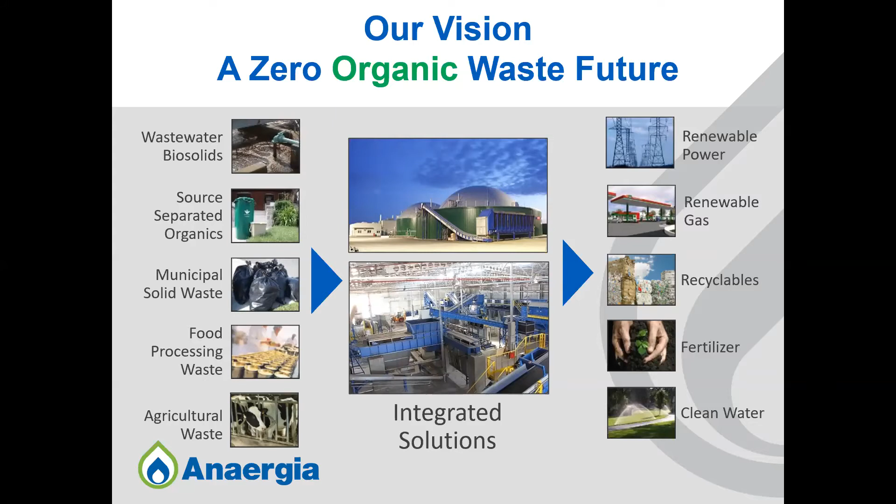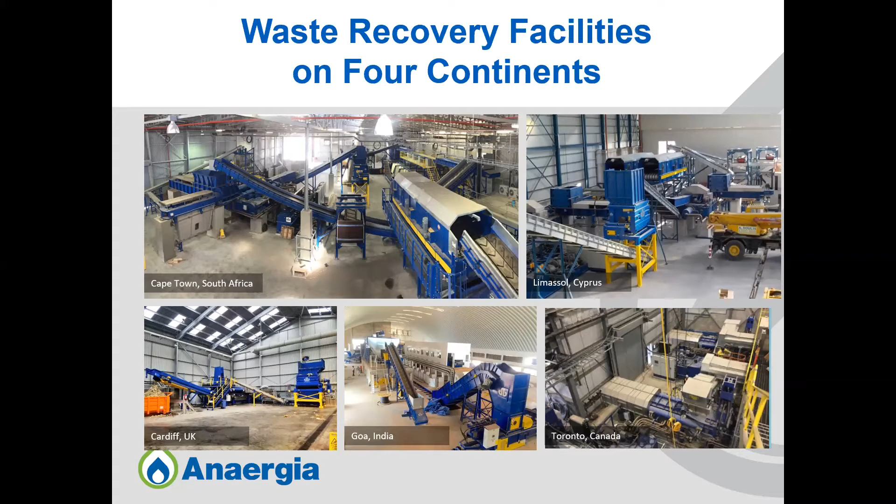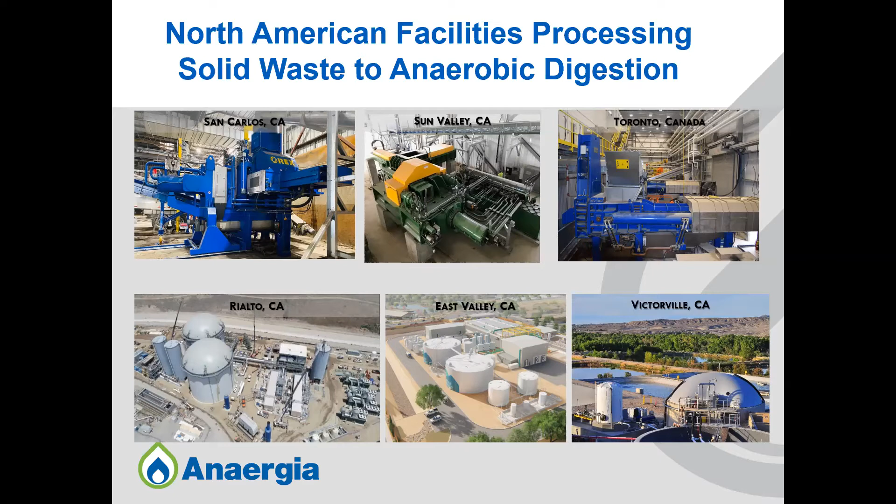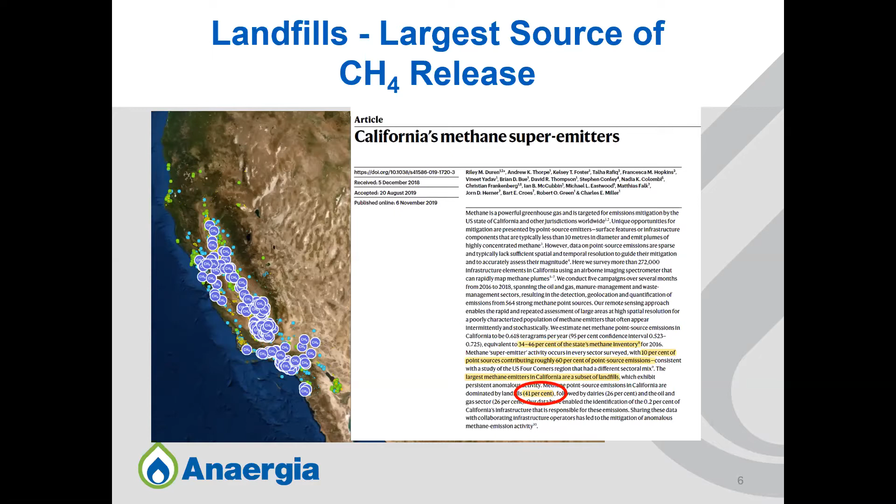Just want to zoom in now into California itself. The largest source of methane emission in California is landfill, which accounts for about 41% of methane from point source emission. You see all the purplish circles where landfills are emitting methane. This triggered the California regulation SB 1383 for the diversion of organics from landfill. This regulation stipulates a 75% organic diversion by 2025, based on a 2014 level. Looking at the projection, it will require something like 20 million tons of organics to be reduced. That's a phenomenal amount of organics that needs to be diverted.

The acceptable options for diversion of that organics are anaerobic digestion and composting. Those are the two acceptable methods. To achieve that, some have estimated it would require upwards of 200 organic processing facilities in the state of California alone. Yes, California is bigger than New York population-wise, but if something like this is mandated in New York, it will require a phenomenal amount of infrastructure.

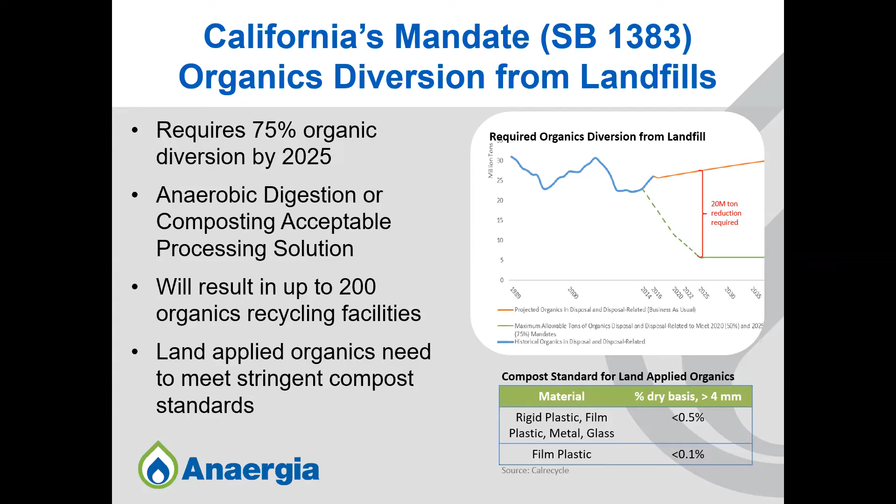Now, one of the fastest ways of achieving this is to extract organics using anaerobic digestion technology to produce methane gas, capturing that methane gas and producing power or renewable natural gas. If you look at the carbon intensity associated with landfill, it has a huge positive amount of CO2 per ton of waste. It's over 200 positive. Even composting has a small positive impact, though significantly less than a landfill.

However, when organics are separated and go to a wastewater treatment plant for co-digestion or dedicated digestion, you end up with a very negative impact. So it's a carbon negative fuel. You're generating a carbon negative fuel if you take organics to an anaerobic digestion facility, and specifically to an anaerobic digestion facility at a wastewater treatment plant.

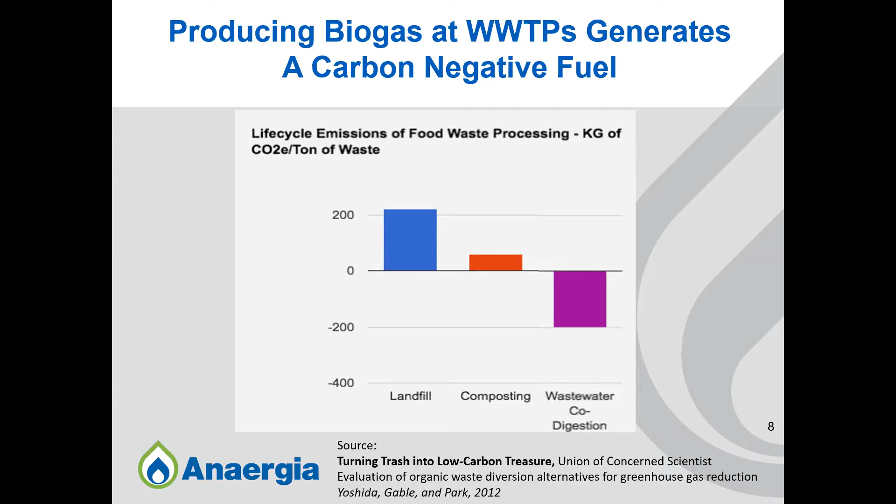This is sort of one of our approaches to organic diversion across the country, in fact. And this is not just Anaergia, but there are other entities that are doing this or looking at doing this as well, where we try to use existing infrastructure, especially associated with wastewater treatment plants, which have digesters, which may have extra capacity or the ability to increase the capacity of those digesters. And in addition to digesting wastewater biosolids, you're taking the solid waste, extracting the organics from it, and sending that to a wastewater treatment plant for co-digestion.

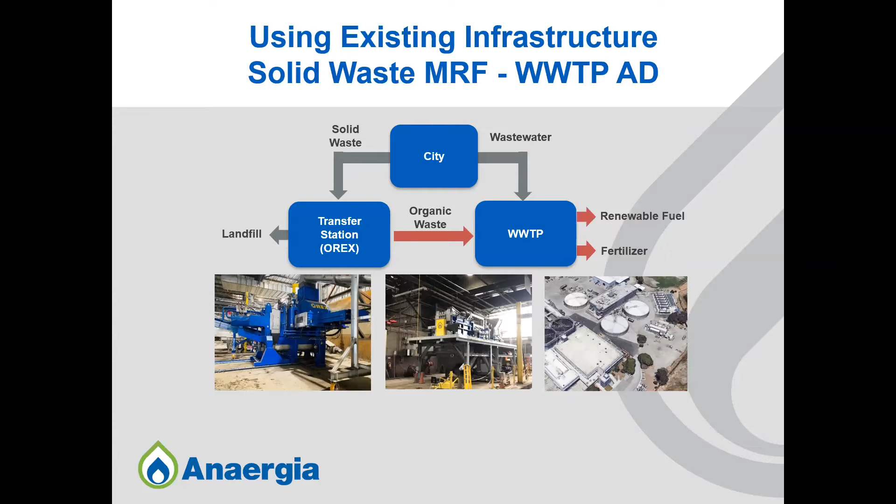And this will generate significant benefit for the wastewater treatment plant in terms of tip fees and more renewable energy generation, but also results in a significantly negative carbon intensity. Now, before you get there, the question is how to separate the organics. There are two philosophies around this, two approaches around organic separation. One is separating the organics at the source, which is separate collection where you have multiple bins, source separated organics, and then you're taking that to a compost or to a digestion facility.

I could tell you that source separated organics may sound great. And usually, for the first 5-10% of participation, it's relatively clean. But as you get up in participation to 50 or 60% of residents, you have an increasing level of contamination, and in Toronto, for instance, we're processing SSO with 25-30% contamination. So it still requires a significant amount of processing.

The other approach is to use a mixed waste collection instead of separate collection, and processing that using a mechanical biological treatment process to separate the organics from the waste, and sending that organics to a digestion facility. Either it could be a dedicated digestion facility, or it could be a digestion facility at a wastewater treatment plant. Some of the benefits for the mixed waste collection and sending it to a wastewater treatment plant is, with mixed waste collection, you're not trying to change behavior in terms of separation and having separate bins and things like that. And it also results in lower costs. You can also use existing infrastructure to process that organic.

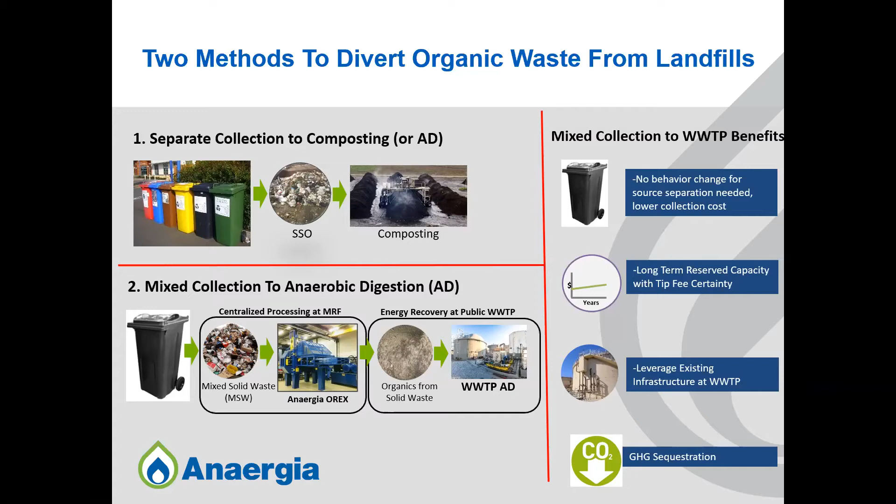In addition, with separate collection, you have to look at the carbon footprint associated with separate collection of that organics as well. And that becomes especially important if you start only collecting a very small fraction of the organics that's in the municipality or in the community. If you're only collecting a small amount and expending a lot of energy in terms of both costs and energy in terms of collection, then you're defeating the purpose.

And this sort of triggers why our preference is the mixed waste process at a high diversion organic processing facility, where virtually everything goes into the same bin or bag, and then it gets processed at a high diversion processing facility, where you remove the recyclables, and you may be able to even generate some RDF if you can get an offtake agreement. But definitely you can remove recyclables, remove the organics, that then goes to a digester, and then the non-combustible, non-digestible, non-recyclable material will then go to landfill. So there's still a place for landfill, but you preferentially would take recyclables out, organics out, combustibles out, and then you send the rest to landfill.

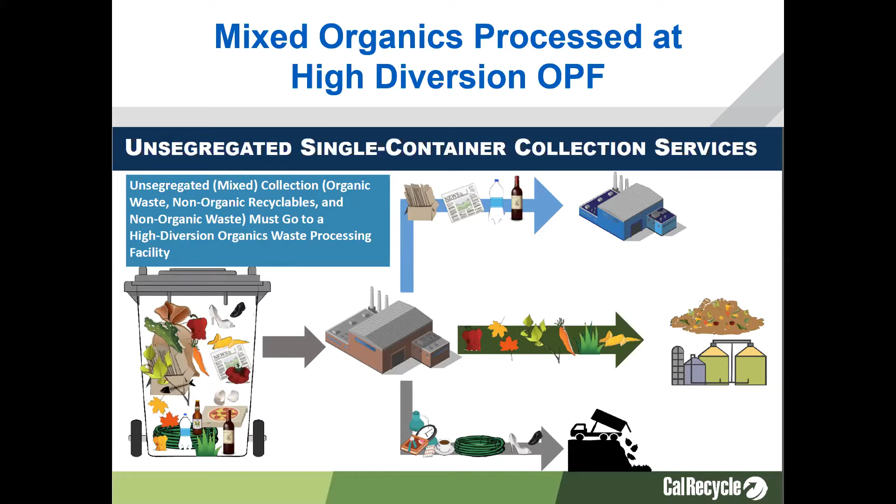We've done some analysis on this and looked at both the collection of the organics as well as the processing and then transportation and disposal. And even if the numbers are not exactly the same, what it tells you is that source separated organic collection results overall in a significantly higher cost when you get up into scale, if you're trying to achieve a high level of diversion, compared to a mixed waste collection and processing.

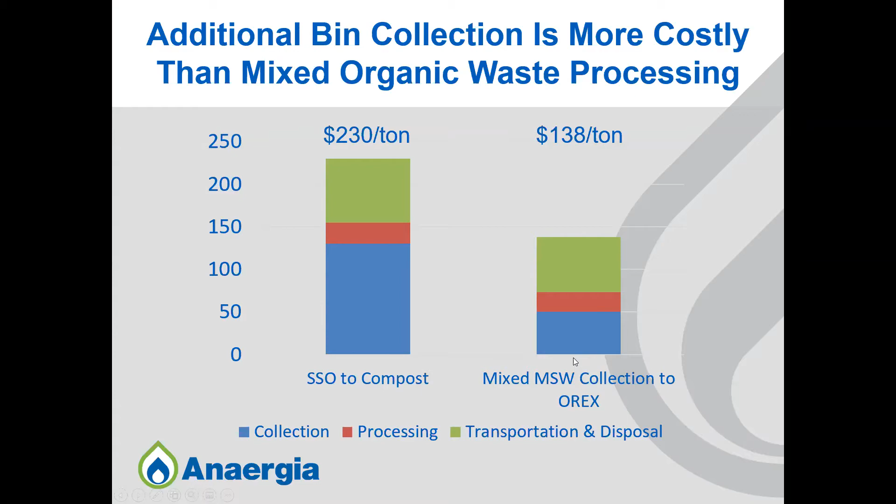With that said, I will go through a case study based on a facility that Anaergia has designed and built in California over the last several years, and that's just coming online now. And this is the facility in Rialto, California. It's referred to as the Rialto Bioenergy Facility for recycling of organics. It has a processing capacity of 700 tons per day of food waste. And this is food waste already extracted from commercial solid waste and mixed solid waste, as well as the ability to process up to 300 tons a day of sewage sludge cake, dewatered sewage sludge from wastewater treatment plants. So this is a project that Anaergia developed, designed, financed, and will operate as well.

For ease here, this project is really taking material from area solid waste, where organics will be separated at the transfer station. One of the main facilities associated with this is a Waste Management transfer station in Sun Valley, California, which installed an OREX press to separate the organics from solid waste and send that organic fraction to Rialto, which is near San Bernardino. As well, the facility will take wastewater sludge from the surrounding area, including around the Rialto area, and process that biosolids as well. And I'll show you how.

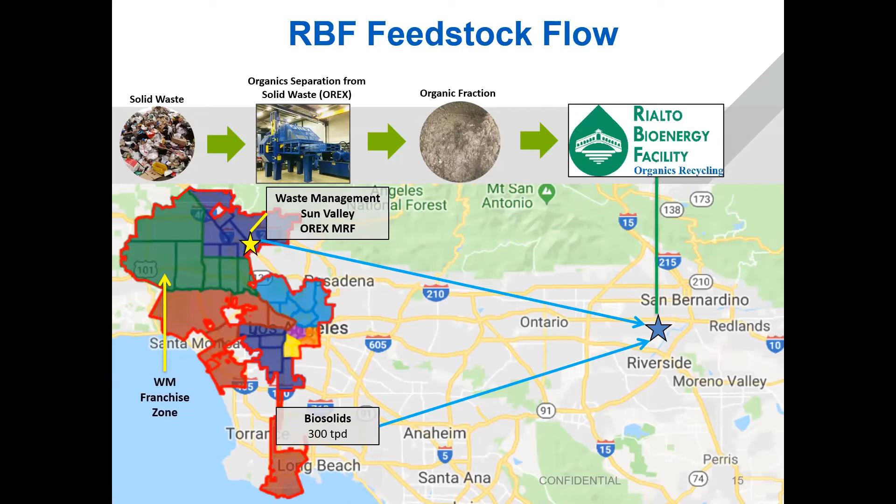So, one may look and say that you need to process everything at the same location. And that's not necessarily the case. You could process your solid waste in one location and process the organics in a different location. Similarly, you could process the mixed waste in one location and separate it into a combustible residue that can go to an energy from waste facility, the organics can go to an anaerobic digestion facility, the recyclables can go to a MRF, and then your non-combustible, non-recyclable, non-organic digestible material will then go to a landfill.

And that significantly reduces the amount of material going to landfill and extends their life. It will also improve the combustion in the energy from waste facility, because you don't have all these metals and maybe plastics and chlorinated plastics and things like that. So you're sort of getting the best of all the different fractions of the waste stream. And then in the case of organics, the digestion will produce biogas that has multiple uses. And the digestate that comes out of that organic fraction, you can convert into a fertilizer product and have nutrient recovery for that fraction.

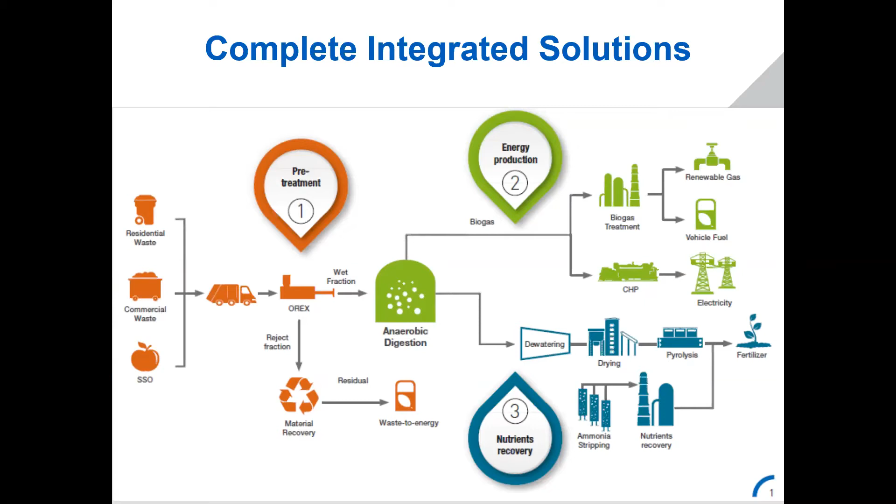In here, I'm just showing a quick example of different fractions: source separated organics that's fairly contaminated, commercial waste and mixed waste. This is just a schematic showing it will be processed, maybe at a transfer station using screens and the OREX press, etc., to separate the organics, and an unpolished organic fraction will then come out. It will still have 2 to 3% contamination in it with small pieces of thin plastic, hard plastics, glass, grit, etc. And then this goes through a polishing step to create a very, very clean organic fraction that then goes to a digester facility.

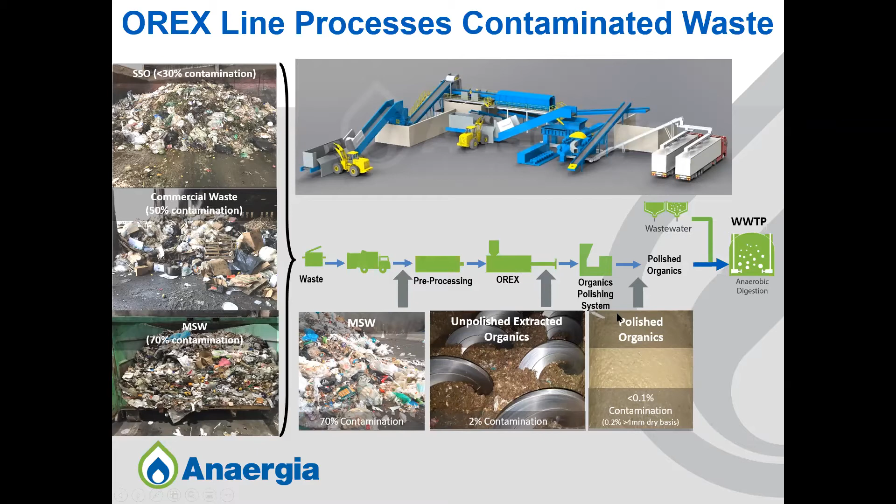So specifically on the Rialto facility here, we have a transfer station where the OREX press is installed, operated in this case by Waste Management, that separates the organics from mixed waste, MSW, or commercial solid waste, and then sends that separated organics as a cake to the Rialto facility, which goes to organic polishing, followed by anaerobic digestion, and then the processing of the gas and the digestate.

Similarly, the dewatered biosolids from the wastewater treatment plant will be brought into this facility. But because these are already digested biosolids, we're putting in here a drying facility followed by pyrolysis to produce a biochar, which is a higher value fertilizer. So there's a two-step process, and there's a significant amount of energy recovery from the pyrolysis process: the pyro oil goes back into the digester, and the pyro gas is used, recovering the thermal energy in the drying process. Basically the pyrolysis is an energy positive process where you generate more energy than it consumes.

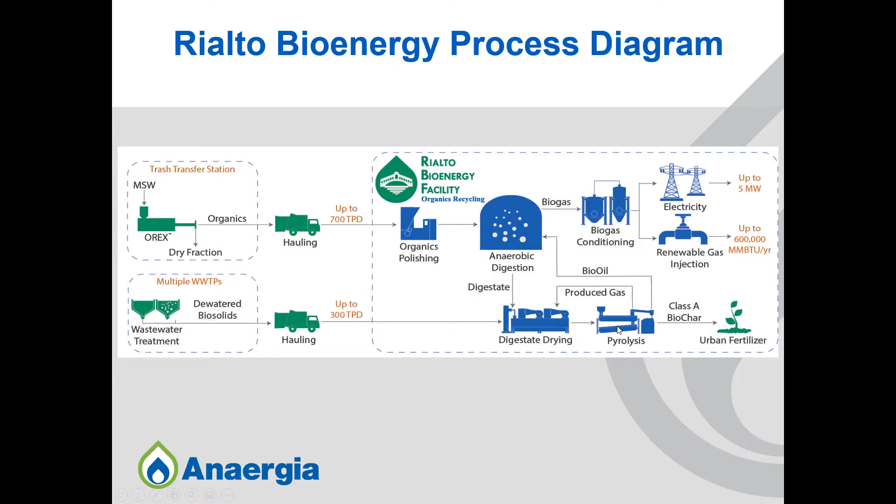So on the organic side, we separate the organics from the solid waste, sending that organic fraction for polishing, as I mentioned, 2-stage polishing: a dynamic cyclone to remove small pieces of plastics and floatables, etc., and then a hydrocyclone to remove grit, glass, stones, to produce a clean organic slurry that then goes to the digester.

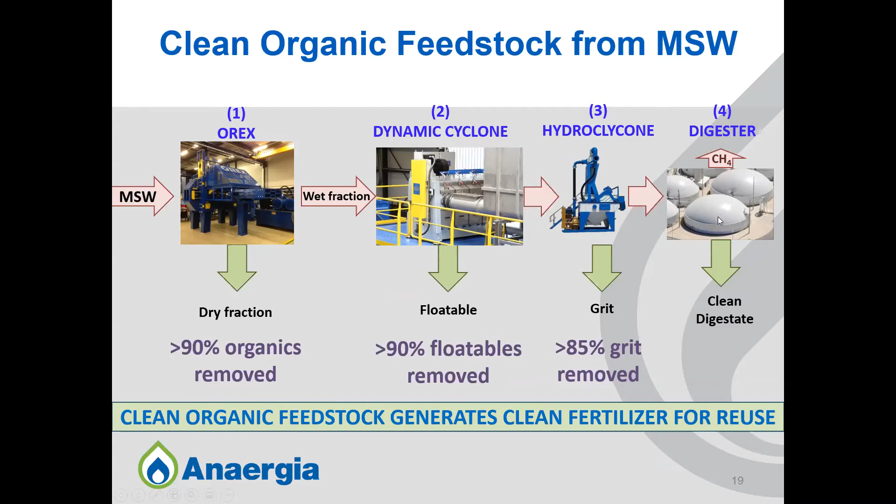This is what the OREX press looks like in Sun Valley, and this is another one in Europe that shows a better view, where the solids are entered into this hopper and then fed into these revolver type perforated chambers, and subjected to very high pressure to generate an organic fraction and a dry residue fraction.

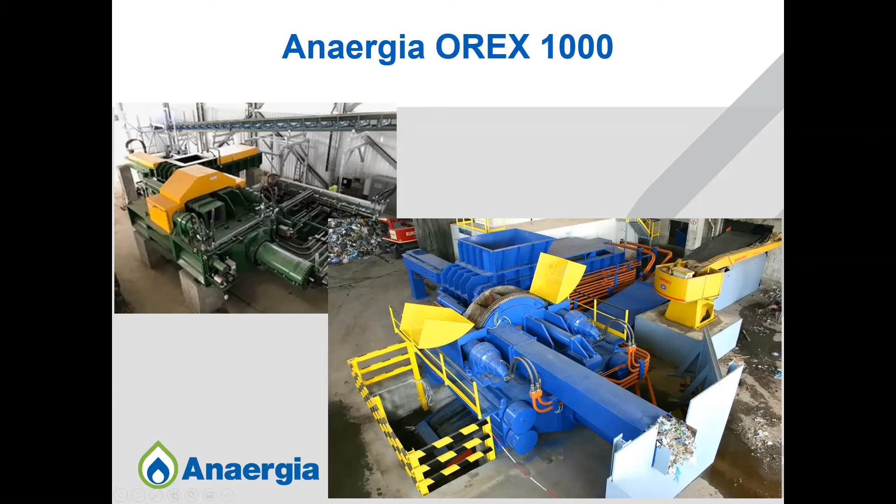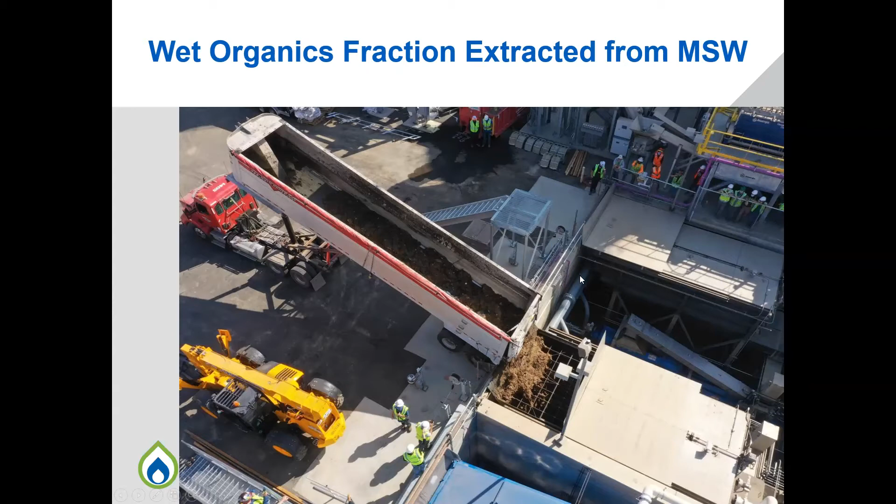This is what the organic fraction looks like. This is basically the first load of organic fraction that was delivered to the Rialto facility just a few weeks ago. As you can see, it's a cake, and there's still contamination in there. It gets into a live bin hopper that then feeds a polishing system. So this unpolished organics fraction gets fed to a polishing system to produce this clean organic slurry that gets fed into the digester.

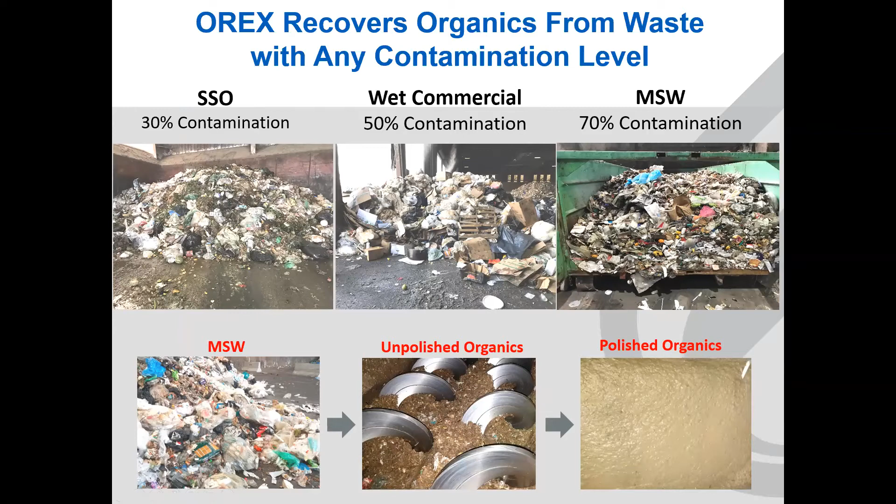This is what the polishing system looks like. It has a dynamic cyclone for removing the small pieces of plastics and floatables that would end up in the digester if you put the unpolished organics into it. And then from this dynamic cyclone, it goes into a double pass hydrocyclone to remove the glass, grit, sand, etc. The clean organic fraction is then sent to the digester, and the grit is washed, classified and sent off-site.

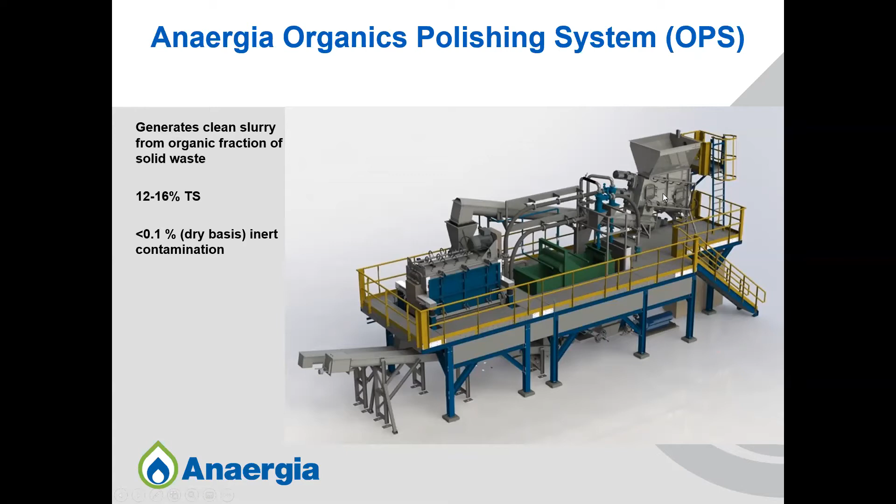This is what the facility looks like. These are the digesters where the organics will go. This is the reception area here. From the reception area, it gets fed into the polishing system, then from the polishing system to a buffer tank, and then to the digester. And then these are the dryers, centrifuges, CHP, etc.

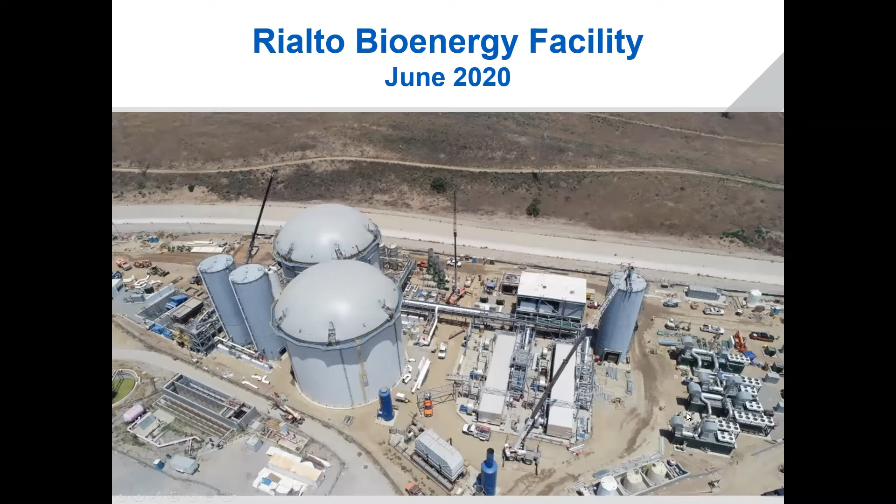So this is what the facility looked like from a rendering back in 2018, what we anticipated the facility would look like at the start of design.

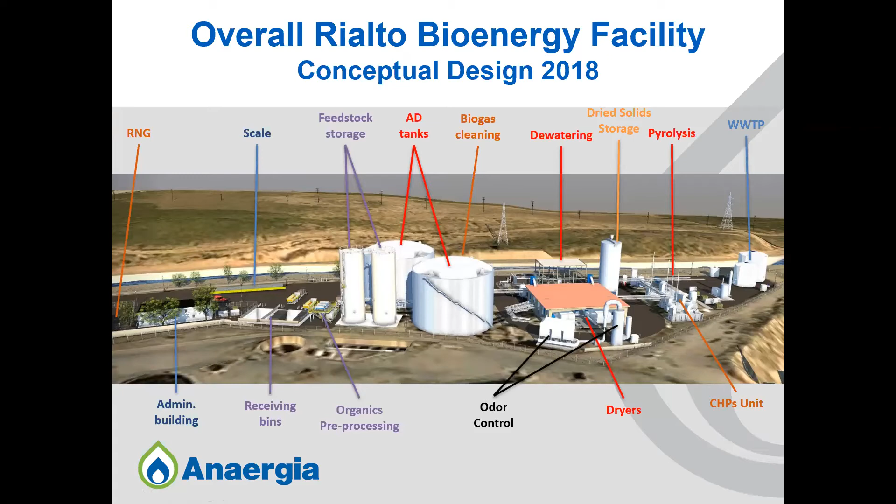This is what the facility looks like today, as of this week. You see there's a receiving bin for the organics, the polishing system, storage tank, digesters, and the biogas cleaning and upgrading systems are here. There's a waste scale, then dewatering, drying. The pyrolysis system is not in place yet, but this is where it will go. CHP and wastewater treatment for recycling of the water back to the front end for dilution.

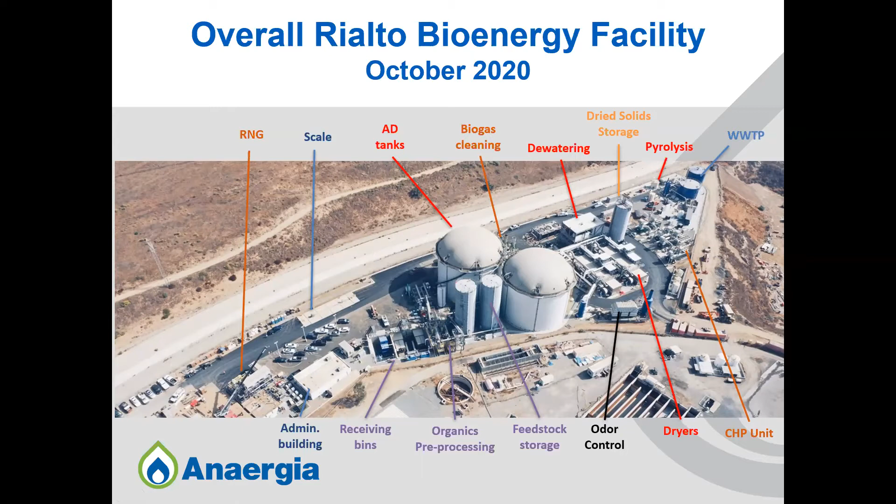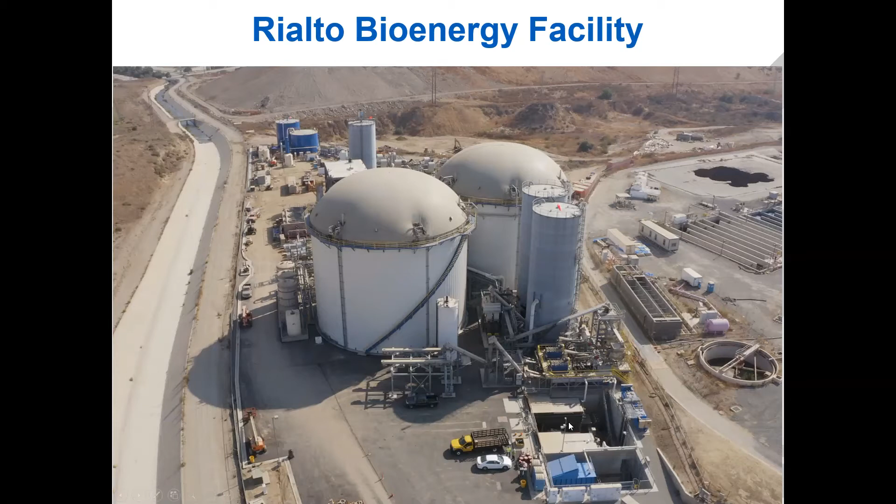And so this is a 5.7 acre site that will be processing 1,000 tons a day of organics from food waste and biosolids. So it's an extremely tight site. This is another view of the facility. Again, this is the reception for the food waste. The polishing system is here, followed by the buffer tank, and then the digester. The gas cleaning is here, wastewater treatment behind here.

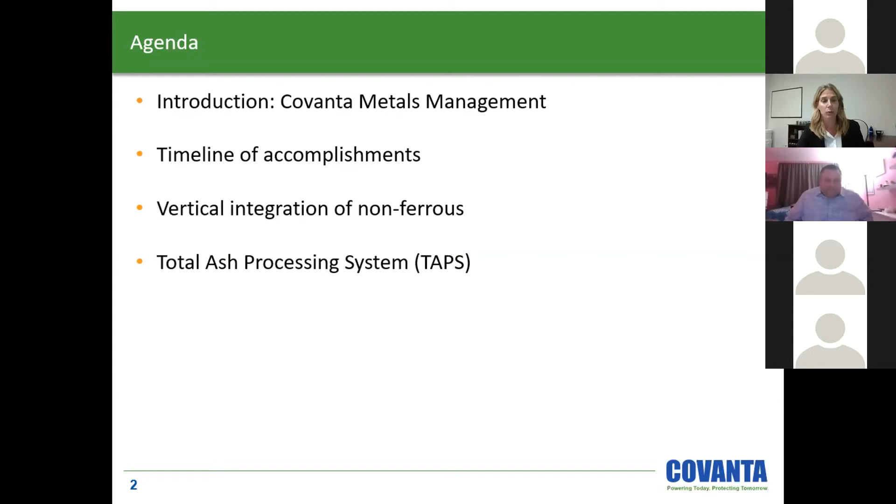But today I'm going to give you a brief introduction on the Covanta Metals Management Group, review our areas of focus and the timeline of our accomplishments, talk a little bit about the vertical integration of our non-ferrous metal recovery, but really want to focus on our total ash processing system, or TAPS as we refer to it internally. We've made significant progress on a really exciting project, so I'm happy to be able to report on that with you today.

CMM Group has several major areas of responsibility. We've got business management and development, so we've got projects at our energy from waste facilities to either install or optimize our metal recovery systems at the plants themselves. But we also have mobile assets, and we'll discuss that a little bit this afternoon. The total ash processing system, or TAPS, development and deployment has really been a huge undertaking over the last probably 3 years, and we've reached that point where we're making product, we're processing ash, and getting really positive results.

Out of this whole total ash processing system, not only are we getting metal out of the ash, but we're also generating a usable aggregate product that can go into the construction market. So I'll give you an update on that today and let you know where we're at. But then we still have a little bit of waste from the system. So how do we realize the value from that and determine reuse opportunities?

As I mentioned earlier, we are generating upwards of 600,000 tons of metal per year across the fleet. We do have folks whose entire focus is really getting those commodities to market so that we can recycle those metals. We have a new group formed whose sole focus is offtake agreements for these aggregate products. And we are embarking on a strategic plan for how to tackle this same issue in Europe for IBA processing and/or fly ash disposal options.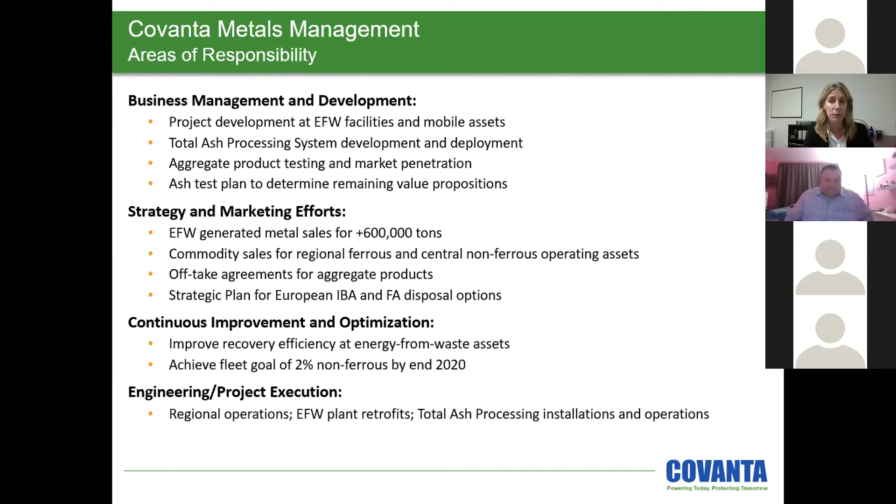Continuous improvement and optimization is always a focus for us. So we're always looking at systems that we have in place. How do we optimize them? How do we make them better? Our fleet-wide goal for 2020 is to reach a 2% non-ferrous metal recovery. As I show you the different parts of our fleet, you'll see how we're able to achieve that. And on project execution and engineering, we have regional operations, retrofits going on at our energy from waste plants, and the total ash processing facility is playing a big role. Since 2012, Covanta has invested in over 70 individual metal enhancement projects across the fleet in different areas of focus.

One would be on the ferrous metal side. We've been doing ferrous drum installations and upgrades at our energy from waste facilities. We've installed shredder and air classification systems, and we constructed and operate a regional ferrous processing facility, a non-shred facility, and we'll talk a little bit more in detail about that today.

On the non-ferrous side, this has been a huge success for us. It's installing and optimizing non-ferrous separation systems, eddy current separators, where we focus on both the plus 10 millimeter fraction and the minus 10 millimeter fraction sizes. What we're finding is the more valuable metal is in the smaller ash fractions. So how do we recover that metal so we can recycle it back to market? We've done a lot of tests on separating bottom ash from fly ash so we can get better metal recovery. And we also installed and now operate a central non-ferrous processing facility, and we'll talk about that and the success story there.

On the mobile side, we realize it's not necessarily feasible to send everything to one centralized facility. And at some energy from waste plants, it might not be feasible to do the level of metal recovery and processing that we'd like to do.

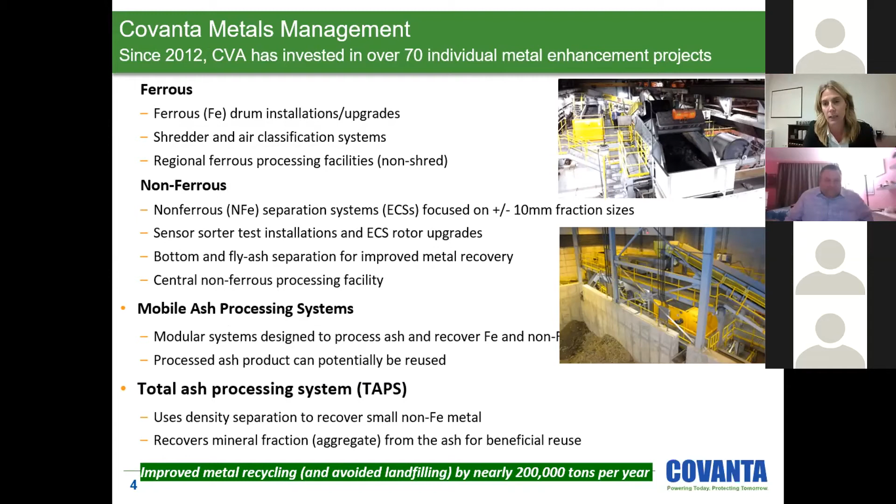The real success story, and we'll talk about TAPS today, is that we're now getting to the micron size. So in the past, about 4 millimeter was the smallest we could recover. Now we're getting down to the micron size metal with our TAPS technology. So huge success for us, and we're really excited.

So the Covanta Metals Management Group really formed in 2012. It started with 3 people, and now we're at, I believe, over 30. And the areas of focus for our group have evolved as we've learned more about our product. So 2012 and 2013, we were really focused on how do we get the metal out at the energy from waste plants? How do we effectively recover that ferrous and non-ferrous metal?

But as we were becoming more and more successful at metal recovery, we started to take a look at the ash itself. So 2014 was a huge research initiative to look at ash. What's in our ash? What value is still left in there? And how can we reuse these materials?

So in 2015, we built a pilot plant processing facility at a third-party research lab, and we processed ash from various energy from waste facilities across our fleet through a wet processing technology, through a density separation technology.

We're able to validate that we can recover these small, micron level size particles of metal, but that the inert material that's left is actually a really good construction material. It looks like aggregate, like a sand or a stone that you would be finding in a construction market today in applications like hot mix asphalt and ready mix concrete.

So while we started learning all of this about the pilot plant, at the same time we started looking at our central processing facilities, understanding that at the energy from waste plants, we were very successful at recovering both ferrous and non-ferrous metal, but that these metals still had some ash on them. It was a varying size, and we really weren't able to see the real value from them.

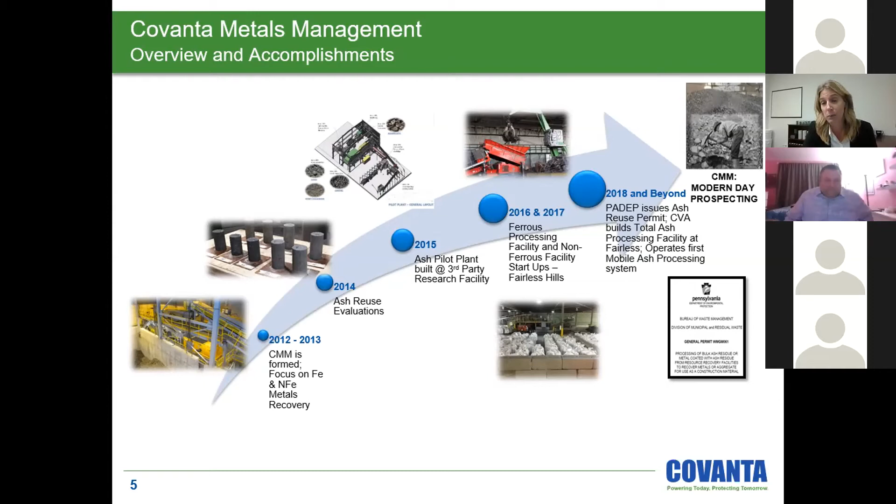2018 was really the kickoff to our TAPS, our total ash processing system, by us picking our site and applying for a permit from the Pennsylvania DEP to allow us to process energy from waste ash to generate a construction material. We kind of giggle amongst ourselves internally. We're kind of modern day prospectors in what we're doing.

So we've talked about the evolution of the different stages and the different roles of CMM over the years, but since we really started looking at metal and ash in 2012 to where we're at in 2019, it's been a significant increase in both the ferrous and the non-ferrous recovery that we're able to do annually. 2019, we ended the year with over 570,000 tons of ferrous metal recovered and over 56,000 tons of non-ferrous metal recovered, far exceeding our initial expectations, and we're seeing that these numbers are just continuing to climb.

So as far as metal recovery, we're actually over 600,000 tons now of metal each year, and that's really enough steel to build over 400,000 automobiles and enough aluminum to manufacture more than 3 billion beverage cans. So we're talking about a tremendous amount of metal that we're able to return to the market that otherwise would be going to landfill.

When you look at our environmental impact, let's say we were not recovering all of this metal; to produce and mine this new steel, aluminum, and copper is a really carbon-intensive process. So if this metal was going to landfill, it would be lost forever. But we're able to save more than 1.2 million tons of greenhouse gases every year. And that's the equivalent of taking 113,000 cars off the road every year.

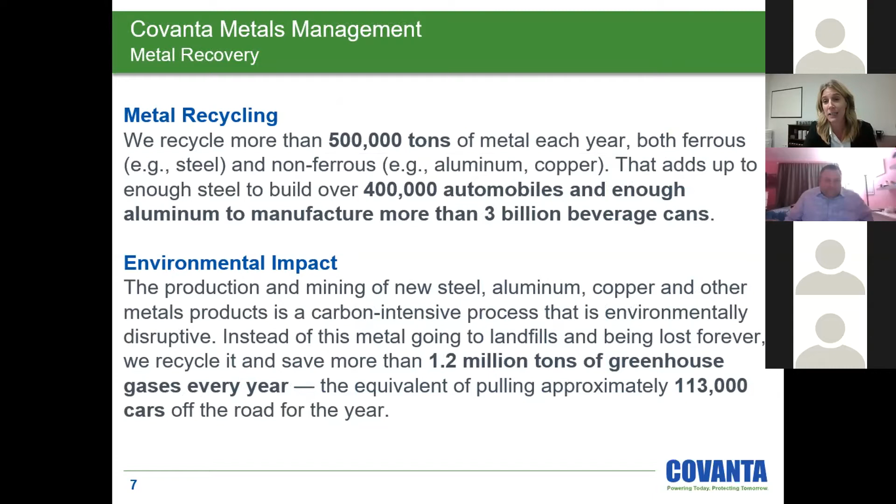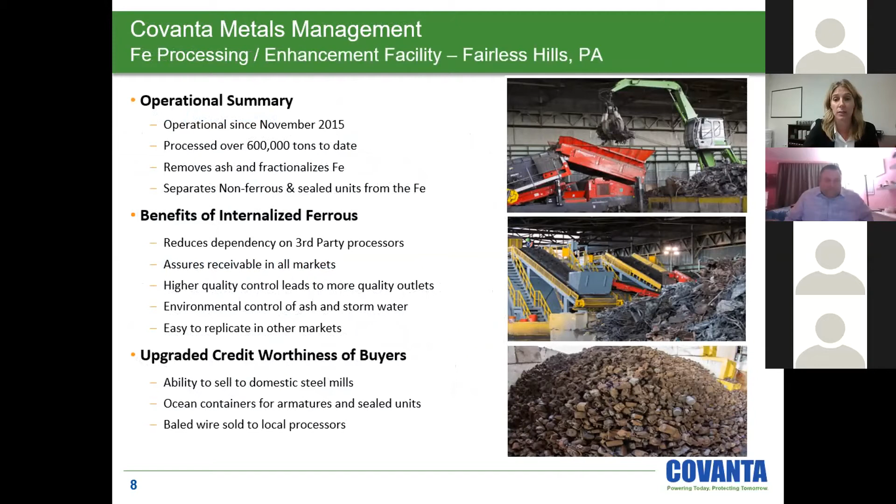So it's truly significant the impact our metal recovery has been. So we briefly mentioned our ferrous processing facility. We kicked that off in 2015. We're able to get the remaining ash off that metal, separate it into different sizes, and sell it to third parties. It's a higher quality because we've done this additional processing, and we've been able to realize more value there. We can now sell both domestically and overseas, and we can even bale material for local processors. It's a nice facility. We're able to do a lot of processing there.

The non-ferrous is really where we've seen our significant advancements. So instead of having a mixed non-ferrous metal, which would be lights and heavies combined, really with still some ash on that, our centralized non-ferrous facility separates this material by size, it separates this material by density, it cleans it, we're polishing it, and we're able to really realize the value of the different metal commodities that are in here. So instead of selling a mixed non-ferrous metal out to the market, we can give them a clean copper product or clean brass, clean zinc, a clean aluminum.

And shockingly, what people love when they come to a tour of the facility, the highlight is always the coins. Think about how many times you vacuum out your couch cushions or your car, and you're sucking up all of these coins. Our non-ferrous processing facility is actually able to recover these coins, and just the volume of coins that are in the trash is just tremendous. So the non-ferrous processing facility, operating since 2017, has been a huge win for the Covanta Metals Management Group and for Covanta overall. But total ash processing, kind of why we're really here today to talk about it.

Again, I had mentioned in 2014, we started looking at the ash to say, what's in this stuff? Is this usable? They started to evaluate the ash, both from a chemical and a geotechnical perspective, and realized this stuff could be used in construction applications. There's definite benefit here. Early on, there was some progress made in Pasco County, Florida, where this material, bottom ash material, was used as a road base. So this TAPS process, this research initiative said, hey, this material's got some potential, and putting it into landfill really shouldn't be the fit. It's not the end of the story.

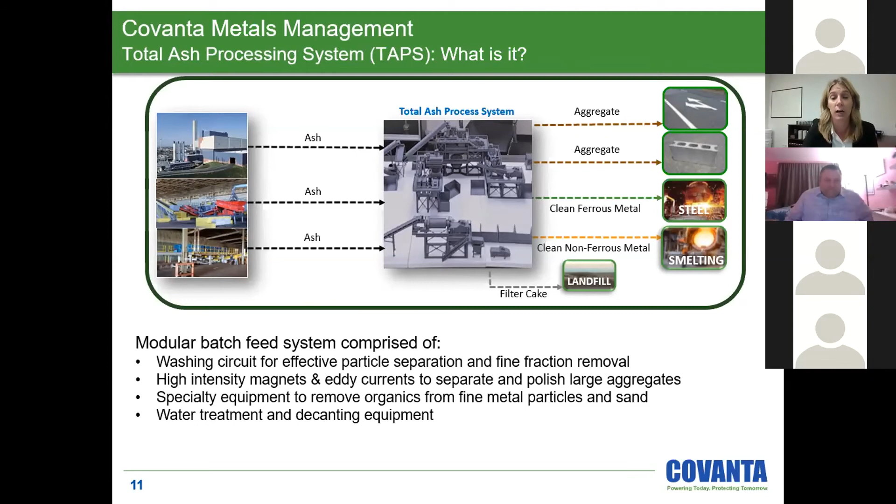And we have an extensive water treatment plant attached to this TAPS. We are a zero water discharge facility. And because we operate through a wet processing system, there was no air permit required for this particular facility. So our facility is located in Fairless Hills, Pennsylvania. So we approached Pennsylvania DEP with this concept, and they issued a general permit in March of 2018 for all of Pennsylvania that basically allows for the processing of ash residue to recover metal and or aggregate for use as a construction material. So a lot of work and attention went into working with the DEP to make that happen. That was really starting in 2015. So it took about 3 years to get that permit issued.

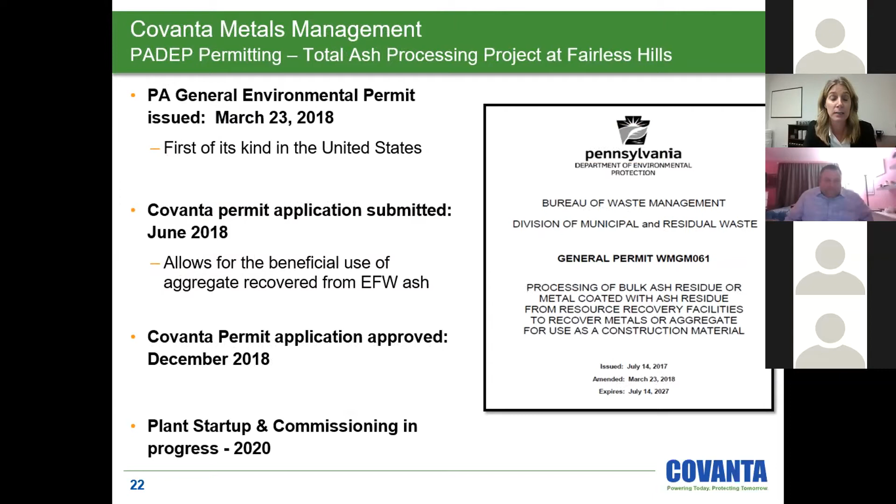We submitted our permit application that June, and we heard back from DEP in December of 2018 that says, go ahead and build it. So it's been kind of a long process to get the facility built. Obviously, no one ever really wants to build and start a brand new facility amidst a global pandemic, but we've been successful in doing so. And we're in startup and commissioning mode of the facility right now.

I come from a background of quality control in mining operations and quarries. I've worked for asphalt and concrete companies, so I'm very well versed on what that construction market is looking for from an aggregate, and we're able to achieve that with this total ash processing system. So you might wonder, well, what the heck are we testing this aggregate for? We have an on-site laboratory at our Fairless Hills facility. We're testing metal in that laboratory, but we're also evaluating the aggregate materials that TAPS is generating.

We're looking at a couple different parameters of that aggregate. One would be the gradation or the particle size of that particular material. Depending on whether it's going in asphalt or concrete, there are different specifications for the size of that aggregate to be usable. We're looking at the bulk specific gravity of the material, or the ratio of that mass per unit volume. So water has a specific gravity of 1.0. How heavy is your aggregate compared to water?

The absorption of the aggregate is also a factor. So there is pore and void space within an aggregate particle, so moisture will be absorbed into some of that pore and void space. So how much water does that particular aggregate absorb? That's important when you're doing volumetric mix designs in both concrete and asphalt, and also the density of the material. We're talking about material in pounds per cubic foot. Are we looking at conventional weight aggregate, lightweight aggregate, heavyweight aggregate, that kind of thing?

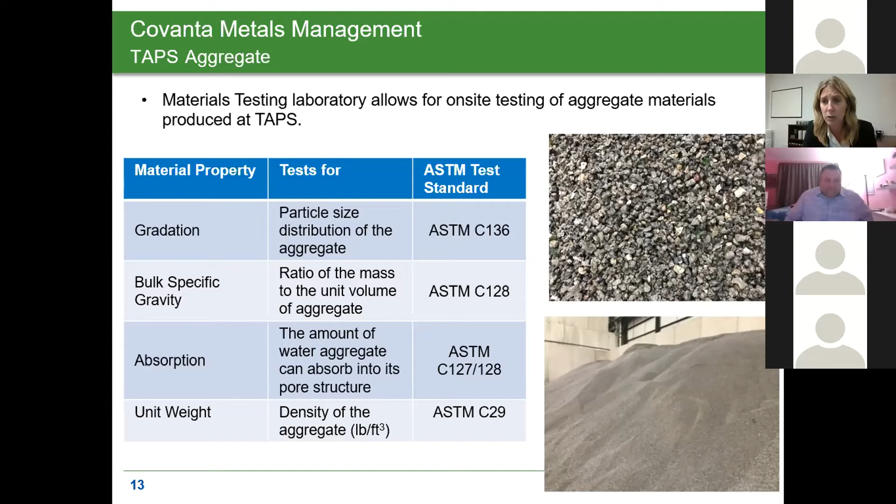And all the analysis that we've done has been according to ASTM test standards. So it's a construction materials testing national standard that's used for all different construction applications. So the first step was taking a look at this aggregate and saying, what's the quality of the material that we're able to recover by looking at those various parameters we just discussed. Now, let's get this aggregate into a finished product.

So we partnered with a university here in New Jersey, and we successfully designed some Superpave asphalt mixes incorporating the aggregate from the TAPS process into that asphalt. And I know it's hard to see and hard to appreciate how beautiful this is, but this is a sample of the asphalt that we've made with our university partner. We were able to meet pretty much all the DOT requirements. So when you're making asphalt, there's a bunch of different parameters that you need to test it for to make sure that it'll be a long-lasting pavement. And we were able to check the boxes on all of those requirements for the mix.

We also have done some performance testing. There's only a few research laboratories in the nation that are able to do this performance testing. We were lucky enough that this was one of our partners. They had the ability to do some long-term moisture susceptibility, cracking, and rutting potential tests on our asphalt that incorporated Covanta aggregate, and we passed those specs. So very exciting for us. We're like, this is great, this is awesome. We made it work in a lab, but does it apply to real life?

Glad the timing worked out really well, because last week we paved over 200 tons of 12.5 millimeter Superpave asphalt surface course at our Fairless facility, on one of the access roads, that incorporates our aggregate. So it's really our first successful test run. And you can see there's a picture here of the paving crew on our site laying down that asphalt.

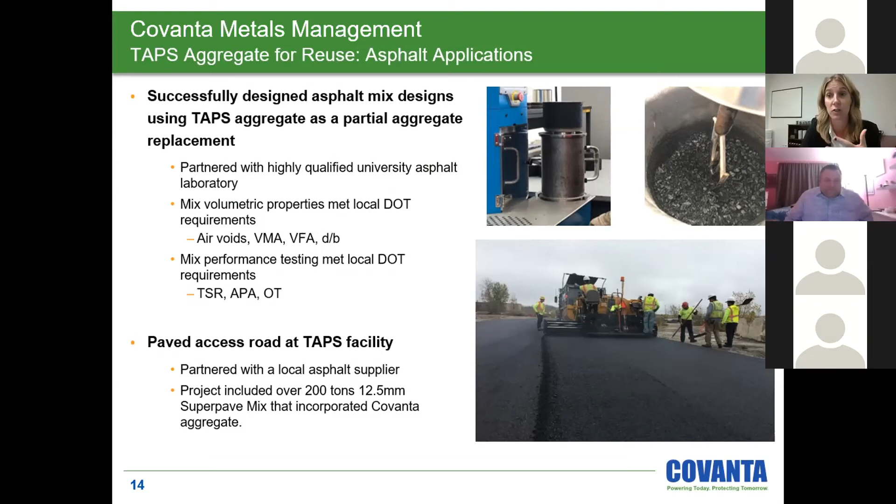But asphalt really isn't the only market we're looking at. There's a couple other construction markets that we're looking at. Ready-mix concrete would be one of them. So we're taking a look at low-strength, non-structural applications. We don't want to put this in high-rise buildings, but things like slabs or footers or curbs. There's definitely a potential to use our aggregate in concrete mixes.

Here's a cylinder that was produced at a local university partner, which has a percentage of Covanta aggregate in this concrete mix. We were successfully able to develop mix designs that incorporate our aggregate that hit between 3,000 and 4,000 PSI at 28 days. So that's pretty much the bread and butter for the concrete market. That's their everyday mix. It's used in common commercial applications.

And we've been bringing our aggregate to local producers, showing it to them, showing them some of this data, and there's really positive feedback. There's some excitement in the market to use this recovered aggregate. So very excited about that.

And in addition to the aggregate, we're also extracting a low-grade ferrous material from our TAP system. And what we have found is that it could be a good fit as a raw material in the production of Portland cement. So Portland cement mix designs incorporate a small percentage of iron oxide, and our low-grade ferrous meets that criteria. So we have done 2 full-scale tests now, one in Pennsylvania and one in Florida, using our low-grade ferrous as a constituent in Portland cement.

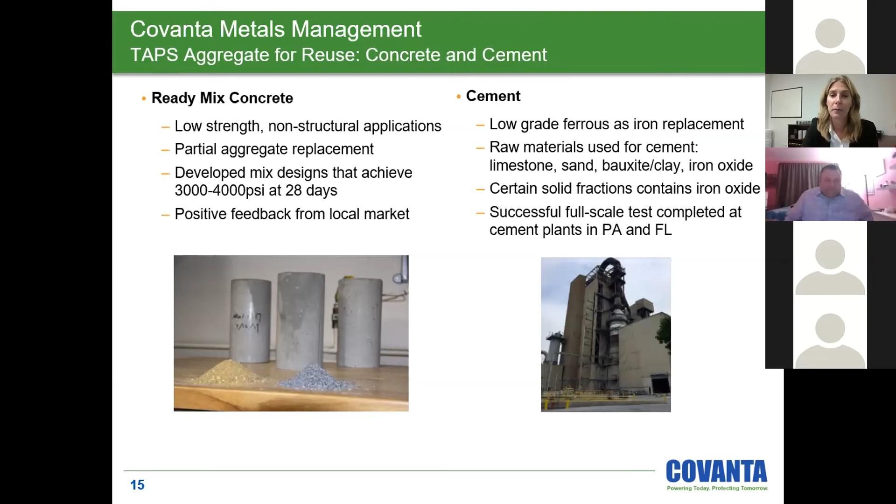So, overall, there's been a huge evolution in our CMM group. We really kind of just started at looking at metal, right? We went to our energy from waste plants and said, how do we pull this out of the ash? And the great part about being in our group is that once we check that box, we're moving on to the next iteration.

We're constantly evolving. So the construction and operation of our central ferrous and non-ferrous processing facilities has been a huge benchmark for us. The mobile ash units that we have that are able to go on-site to landfills to recover metal has been a tremendous addition to the fleet. And now that we're at this total ash processing step, we're really excited for what the future holds for ash reuse. I don't think we ever would have anticipated that we would get metal fractions as small as we're able to recover from this TAP system.

And definitely, I had a big smile on my face last week standing on the paving site; watching that asphalt go down with our aggregate in it was truly tremendous. So a lot of good things are happening here at Covanta, especially in the metals management group. I think when I was presenting last May, it was kind of like, well, we're going to build TAPs. We're hoping that the aggregate's awesome and that it's workable in a construction application. And I'm just really happy to be able to come today and tell you we're making it happen. And we're excited about what that brings for us for the future.

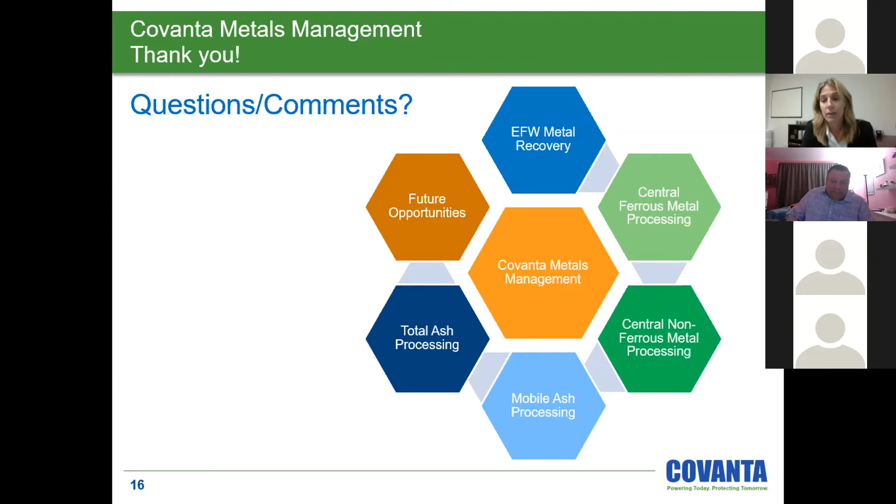So that's correct. That was not because there was a lot more ash. No, our ash kind of has been relatively consistent. So this increase that you're seeing is truly the benefit of all of these enhancement projects that our group's been focused on. Okay. All right.

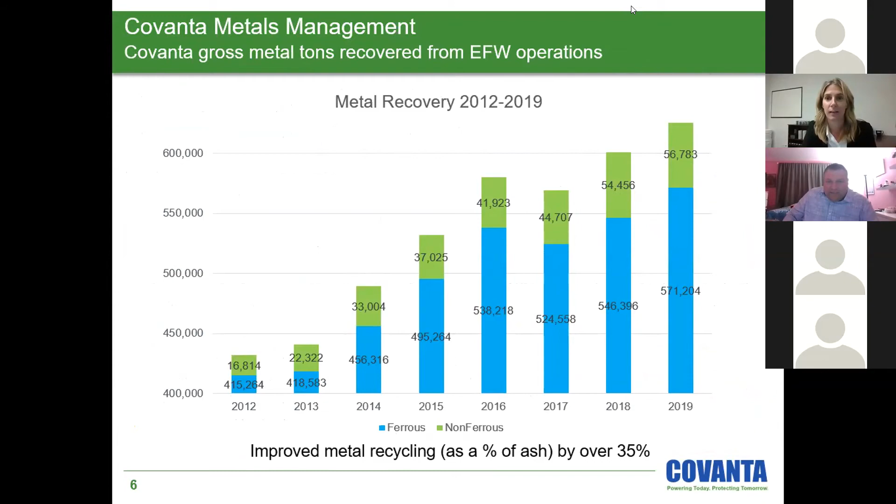Great. Thanks so much. With that, I'd like to bring in our last presenter, Dr. John Atkinson. He's an associate professor at the University of Buffalo. He has a PhD in environmental engineering and civil engineering and has been in 36 publications. He's going to present to us on the greenhouse gas emissions associated with waste energy disposal of MSW. John, go ahead. Well, thank you very much, Ken.

Very excited to be here on behalf of my co-authors, Dr. Mohsen Ghafari and Dr. Michael Shelly. Michael is an environmental economist. Mohsen at the time was my PhD student, and he led a lot of the quantitative work that you're going to see in this presentation. He's since moved on to bigger and better things and has a real job now. He's no longer a grad student.

I'm also presenting on behalf of the larger waste management team that we have at the University of Buffalo. I hope that one of the takeaways of this presentation is an idea about how academics can contribute to the broad waste management issues that we're dealing with in New York State and beyond. We have a very, very large plastics recycling team that is working directly with DEC. We just received a new $2 million NSF grant looking at sorting, sensors, valorization of waste plastic, things like that. We're working with multi-layer films

and beyond. So this presentation should give you an idea about, broadly speaking, where academics can fit into a lot of these conversations. It's also a good one to end with. Both Dio and Rebecca mentioned the benefits, one of the benefits being greenhouse gas emissions. And what I'm going to do today is really dive deep into that and be very quantitative in our discussion about where waste energy and landfill lie when it comes to processing waste.

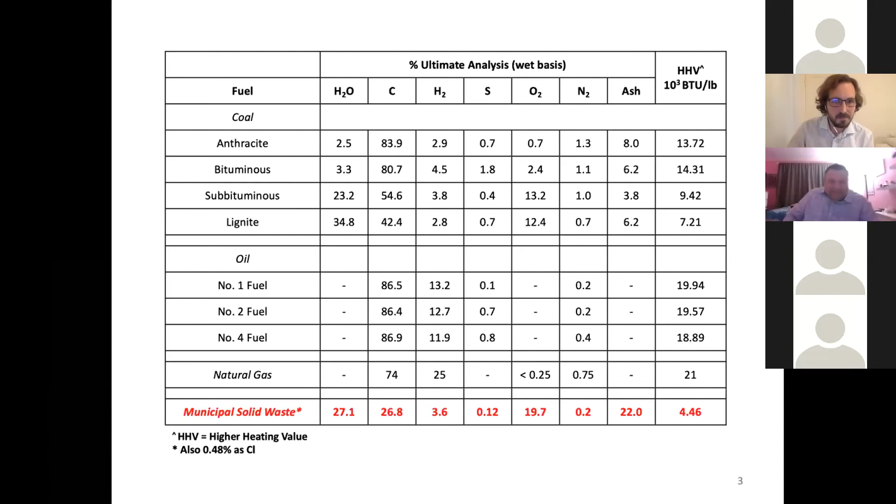So the logical solution, right? We know we got a waste problem in this country, and the logical solution is quite easy. We should generate less of it, right? We should waste less. It's always interesting to me, the people that are loudest about this argument of wasting less are the folks that work in waste energy, the folks that even work in landfilling, right? These are sustainably minded, climate forward, environmentally thinking professionals, okay? And they are the first to say that we absolutely need to waste less. That is the solution. But are we? Of course we are not, right?

And then you have waste energy and landfilling. And as I said, that mix isn't changing. It's a fairly stagnant distribution here. And so it's fine to say we should waste less, but the reality is that we're not wasting less, right? We continue to generate essentially the same amount of waste.

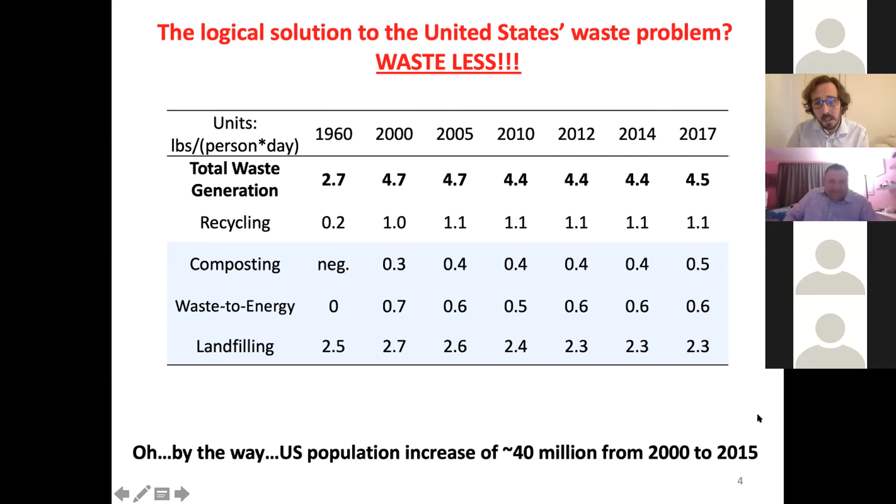Again, I think maybe I'm preaching to the choir a little bit here, but we got to figure it out. We got to deal with it, and we need to have this discussion about waste energy and landfilling. So if you look at those numbers, you take out the recycling, you take out the composting, we see that about 75% of the waste is being sent to landfills.

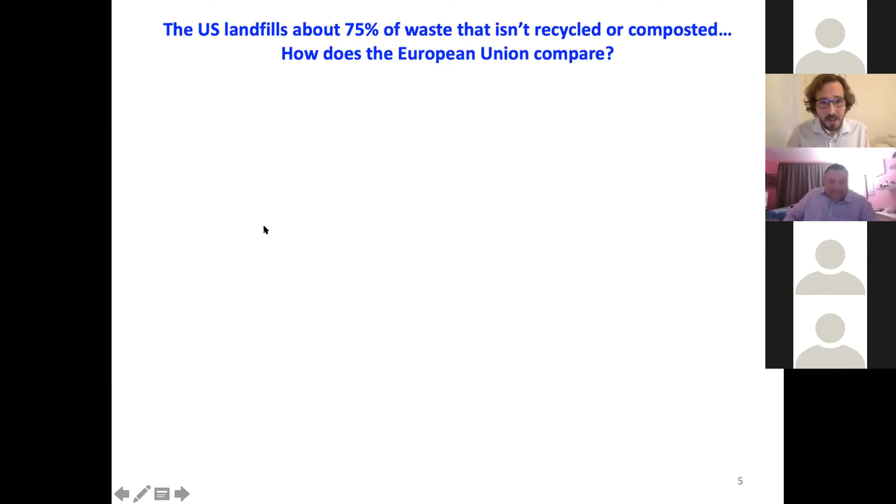We love our landfills in the United States. Okay, so there's a lot of ways that I can tell you this story, but the reality is that this is inconsistent with a lot of developed, highly developed countries. So I'm going to go to Europe. You know, as I said, there's about 1,000 different tables and graphs that I could show you here to make my point, but we're 75% of that waste going to landfills.

The target in Europe was in 2006, so we're talking 15 years ago, was 75%. You have very highly developed countries, Germany, Switzerland, Austria, Denmark, Sweden, that are basically landfill free. Almost none of their waste is ending up in landfills. And so it's safe to say that something different is going on in the United States, right? That for some reason in the US, we like landfills and we don't like waste energy.

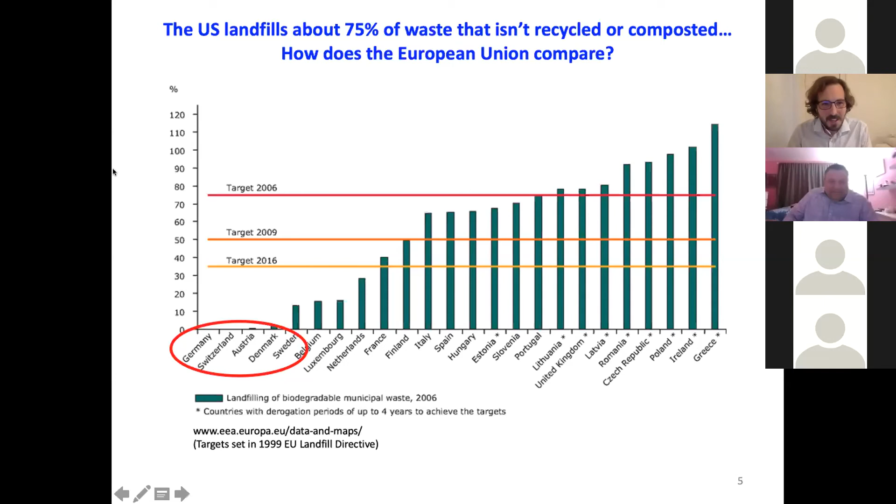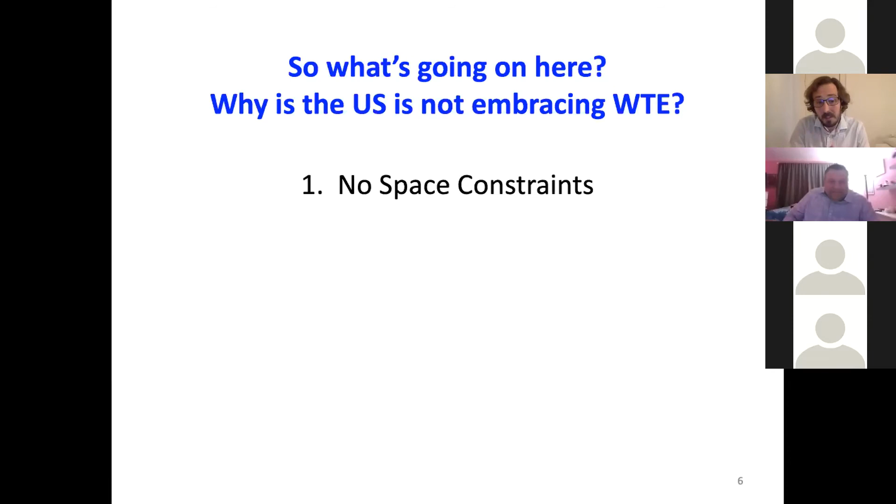And I think this is a fascinating question. It's a fascinating problem. But I think it really boils down to something very simple. Why is the US not embracing waste energy? Well, we're huge, right? There's really no problem with us putting a landfill at every corner or every municipality anyway. Okay, we have no space constraints. That means that we have the space for the landfills and the landfills can be cheap because we can always just build another one, right? If it fills up, we just build another one.

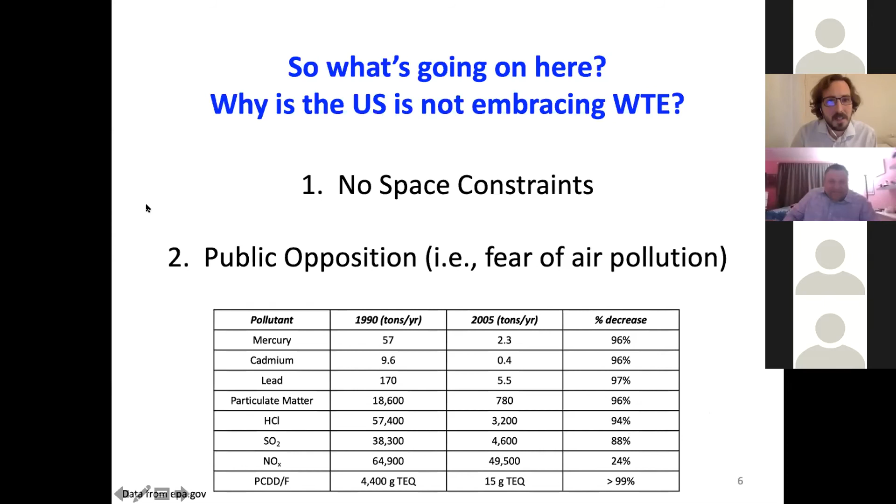And finally, costs. The cost issue is significant. It's one that people need to think about. But I think with the right government backing, government support of these ideas and these technological accomplishments, much like the ones Rebecca talked about before me, the capital cost problem can be addressed.

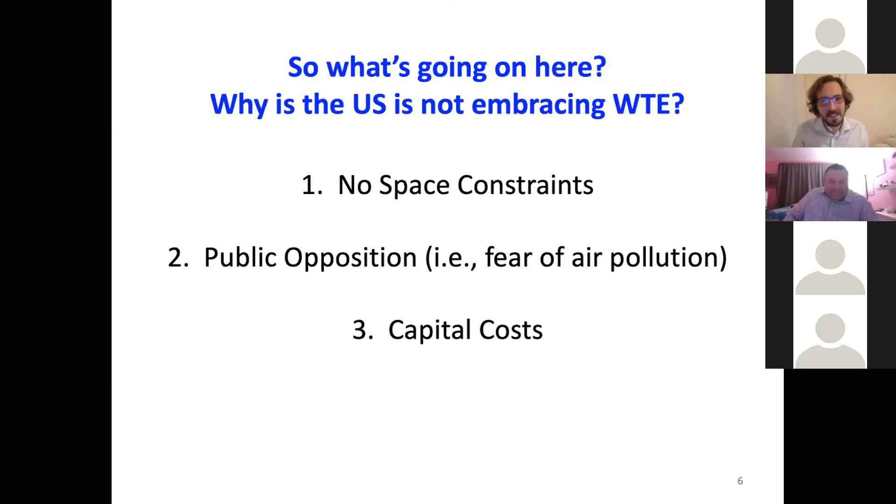And so as an academic researcher, as a person that teaches sustainability to students and is invested both personally and professionally in fixing and speaking about the climate crisis that we're in, I could very easily argue that these things are irrelevant. These are not the questions that we should be asking when it comes to this discussion of landfill versus waste-to-energy, right? Because we have the space doesn't mean that we should use this space. That just doesn't make a lot of sense. And as I said, this opposition problem is kind of irrelevant at this stage.

And so what I'm interested in is CO2. Okay, so to me, as somebody that approaches problems with climate and sustainability first and foremost, this is the type of question that we need to be asking in a conversation like this one. Is one better from the perspective of equivalent greenhouse gas emissions? If we shut down all the waste-to-energy and all that waste instead went to landfills, would we have more or less CO2? It's a fairly simple question, a fairly simple way of tackling this challenge.

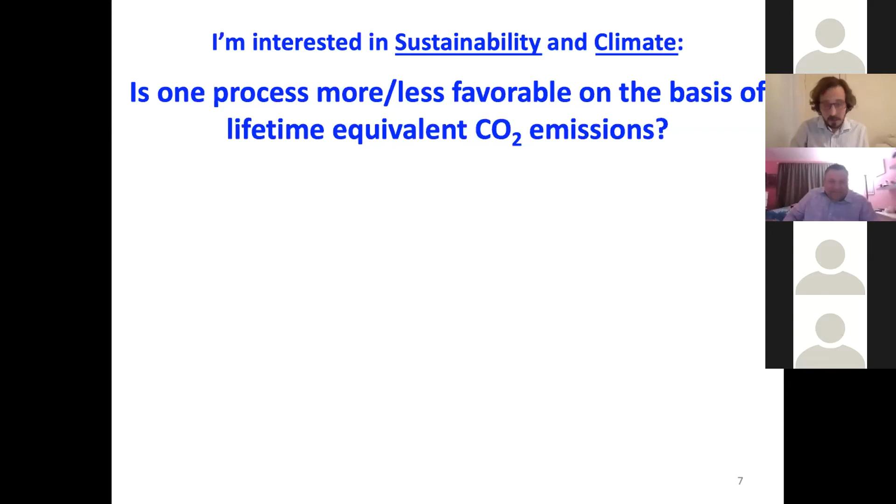Obviously, the calculations aren't so easy. I'm going to present to you how we did some of those, but that's the way that we think, and that's the way that I approached this problem in this analysis. And so very specifically, we worked with Covanta Niagara Falls, and we said, if tomorrow that facility shut down, and all 800,000 tons per year instead went to representative landfills, would we be greenhouse gas positive or greenhouse gas negative?

Would they increase or would they decrease? So ash, as Rebecca talked about, she commented on greenhouse gas emission saving with ash. That was filtered into our model, that factored into the calculations that you're going to see.

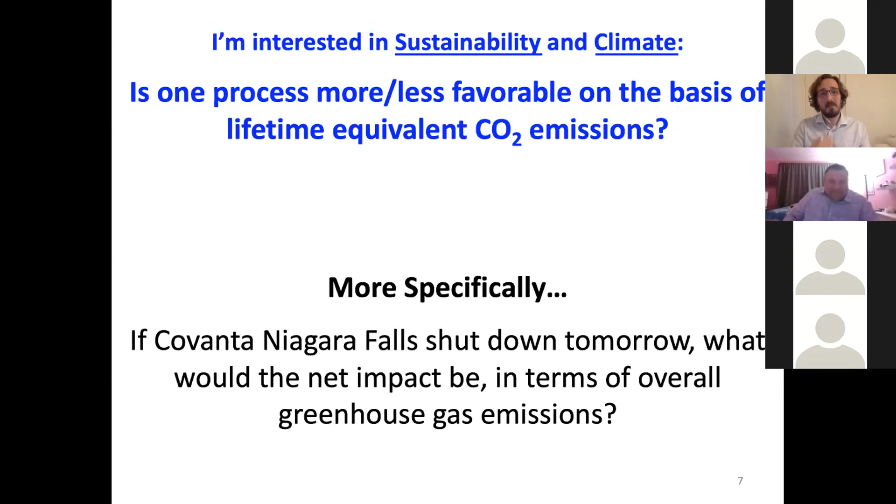Dio talked about organics management and how sending some of these organics to a landfill is generating methane, whereas if we can convert those to CO2 instead, that's kind of a zero-sum gain because it came from CO2, went back to CO2, it's biogenic carbon, not too big of a deal. And so, those two topics that were talked about are going to be folded into the mix here in this story as well.

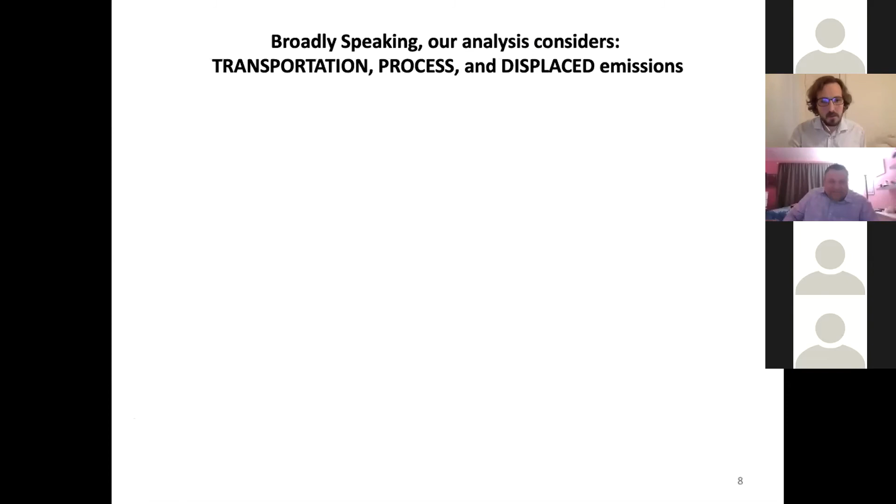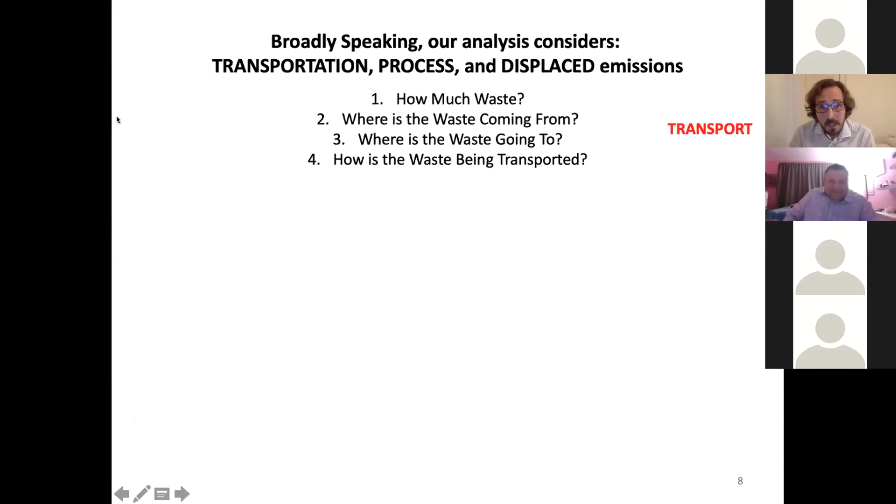So broadly speaking, we considered 3 different categories of emissions, or 3 different places or fields, I suppose, where the emissions might be coming from. So we asked questions about transportation. We said how much waste, where is it coming from, where is it going to, what's the method of transportation. Then we talked about the process. So what's the composition of that waste, what types of landfills, and what are the landfill options that would be attached to those different landfill types.

How does the waste-to-energy facility function? You'll see in a second that the WTE facility in Niagara Falls is a massive steam generator. And so that was a very favorable aspect of that facility when it comes to greenhouse gas emissions, because it's displacing natural gas, essentially. And then collection efficiencies and landfills do generate methane, and some of that methane is captured. And so we need to consider that.

We need to think about how much over the lifetime of a landfill, how much of that methane is captured, how much electricity can be generated from it, what is displaced by that electricity, who are the waste-to-energy customers, where would the electricity otherwise be coming from? So all of these questions, you're not going to see answers to every one, but they're all bundled into the analysis and the responses that I'm going to show you in a couple slides here.

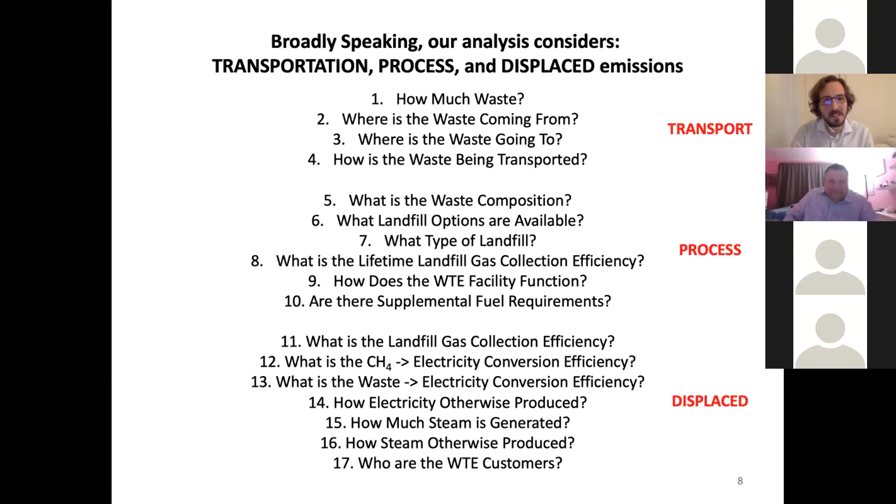So our collaboration with Covanta, it's important to say this here, it provides novelty. So people can model things. People have modeled this question. But what we uniquely had access to was data. Okay, so Covanta was very much an open book with us, willing to provide essentially anything we asked in terms of the data that we needed to answer the questions that I presented to you in the previous slide. So for the most part, our analysis for Covanta was not a model. It was based on actual numbers.

We used some emission factors and talked about global warming potentials and things like that, but most of the numbers were real. It wasn't just input waste, output CO2, right? We knew the amount of steam, we knew the amount of electricity, we knew supplemental gas consumption, all of that. So we had all the information on the waste, where it was coming from, how it was being transported, industrial, municipal waste streams. It's a fairly large facility, pushing 1 million tons per year of waste.

We had full composition data, fossil to biocarbon. That ratio I'm going to discuss quite a bit moving forward. That was one of the independent variables we looked at quite a bit. We had their steam output data, electricity output. They have customers that demand their steam and that demand their electricity.

So if for some reason a facility is down, they do need to consume some supplemental natural gas to make sure those customers are happy. So that was obviously a negative when it came to greenhouse gases that we weren't willing to ignore, of course. And so that was part of our calculations as well. So again, I really can't stress how great this partnership has been. Very professional, very collaborative, I would say.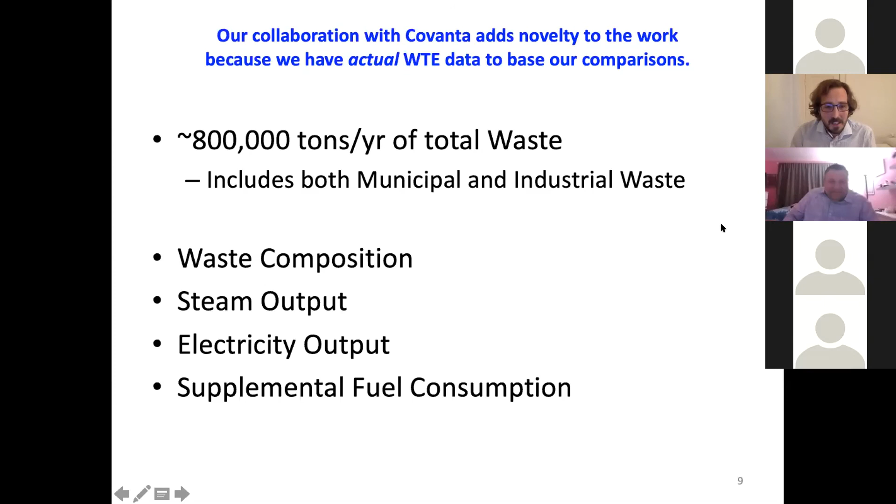And then our estimates for the landfills came from the Municipal Solid Waste Decision Support Tool, which is an EPA model. Now, a comment on models: anytime I present at conferences about this work, somebody wants to argue about models, and that's fine, right? Models have pros and cons. That's par for the course.

I'm not going to sit here and say that this model is perfect and it considers absolutely everything and every assumption is conservative and everything like that. It's just not the case. But whatever model they're going to throw at me, I'm going to make the same arguments back at them. Okay, so the reason we went with this model is because in the literature, it's arguably the most common. It's government supported, right? It's an EPA model, and so it doesn't have a bias attached to it.

And you know, we thought that for the analysis we were presenting, it was the best choice. So all of the landfill data that you're going to see is based on this model. A little bit of the process emissions for the Covanta facility are based on this model as well, so the overwhelming majority of our Covanta data was real data, but a small fraction, including some of the ash stuff that Rebecca talked about, was modeled.

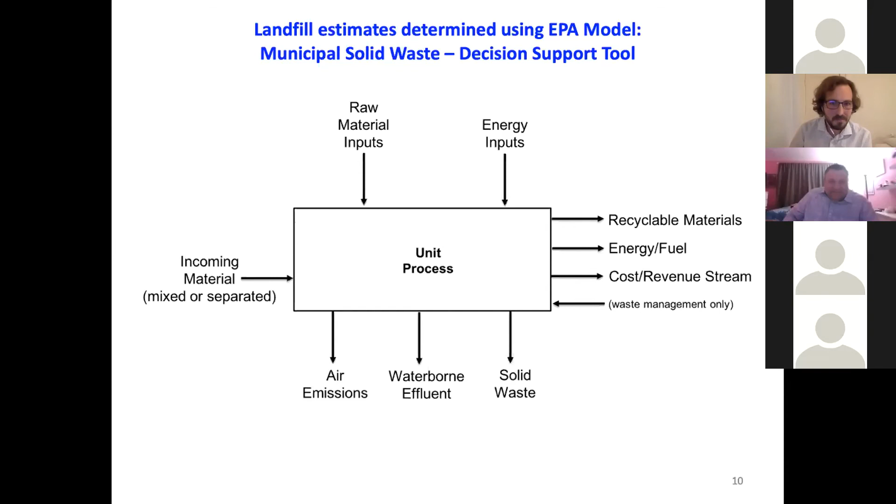And we had to make some assumptions. These are literature standard, not anything too controversial here, I would say. We assumed that the landfill gas would be converted to electricity with an ICE that's 33% efficient. Displaced CO2, so any electricity that's being generated would have otherwise come from a combined cycle natural gas plant. The idea there was that this would be comparable to a peaking unit, which would be gas-based, easy to turn on and off. And then displaced CO2 from steam would have come from a natural gas-fired steam generator with 75% efficiency.

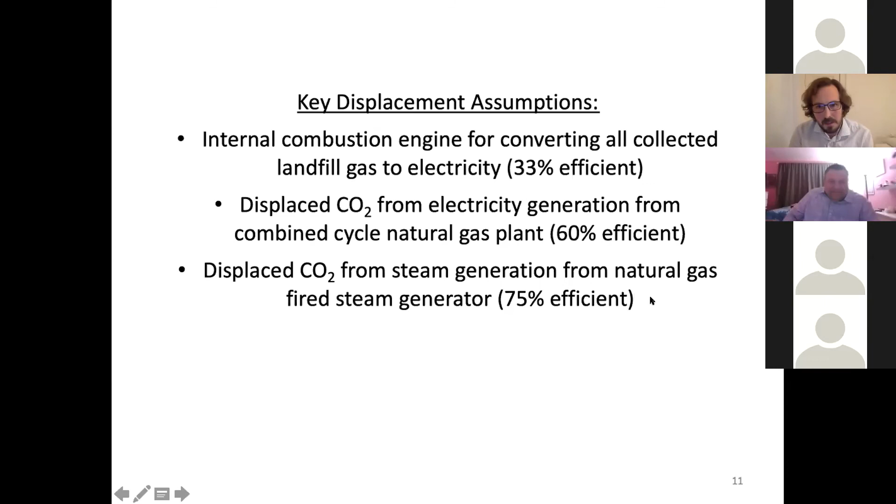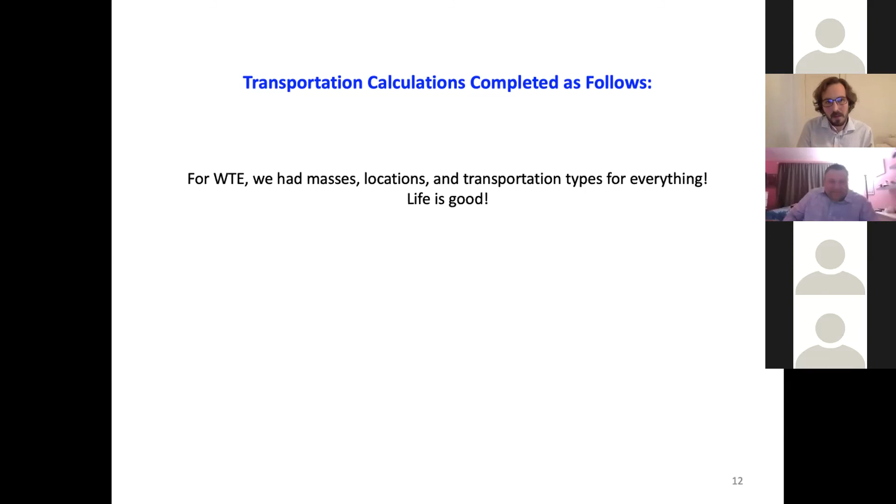So our transportation calculations were interesting. For Covanta, for the waste-to-energy facility, it was easy. We had everything. We had masses, we had locations, we had transportation types. Life is good, right? We knew where it was coming from, we knew what it weighed, and we knew the method of transportation. So if it came X tens or hundreds of miles by train, we put in the weight, we found the emission factor, and we got our greenhouse gas emissions. If it came 200 miles by 16-ton truck or something like that, we got an emission factor and we put it in. So very, very confident in those numbers. Really no modeling involved whatsoever.

A little trickier for landfills, right? Because we're saying if the waste is not going to Covanta, where's it going to go? And so the way that we addressed that problem was to say, for all these waste sources, which we knew, we figured out where the 5 closest landfills were, and we averaged that distance and said it would go there by truck. So I think it's hard to say that those assumptions were controversial. I think it was a pretty fair way to treat the transportation piece.

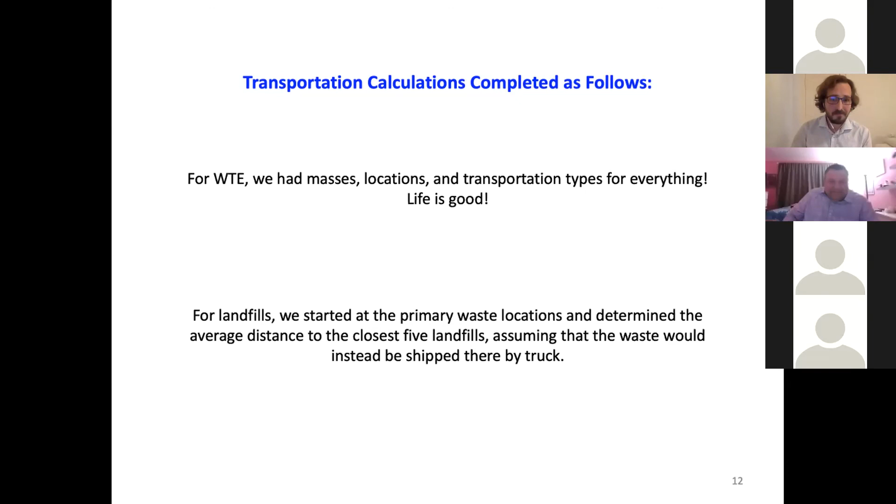And so these are the variables we looked at. We have a lifetime landfill gas collection efficiency. So as I said, all of the methane that's being generated at a landfill is obviously not emitted to the atmosphere. We would have a huge problem if it was. 60% is a value that seems to me in the literature to be pretty well accepted as a 100-year lifetime for a landfill. About 60% of the generated methane is captured. We wanted to have one that was above and below that, and just for our fun, we also wanted to have one that was 0.

Methane's global warming potential. Oh, sorry about that. The textbook value for this is 25, but that value is increasing, and I'll talk a little bit about why. So we went with 25 and 34, which is increasingly becoming the accepted value or closer to the accepted value for methane.

The global warming potential for biogenic carbon: as I mentioned earlier, the yard waste and all that kind of stuff came from CO2, and now it's going back to CO2. So typically biogenic carbon is thought of as having a global warming potential of 0. However, in the recent literature, there's some discussion about that because of kinetics. We burn it instantaneously, but the plants take a season or a year to grow. So some folks are using an upper end of 0.32. So we wanted to use a landfill friendly, if you will, assumption and see what that number would do to our analysis.

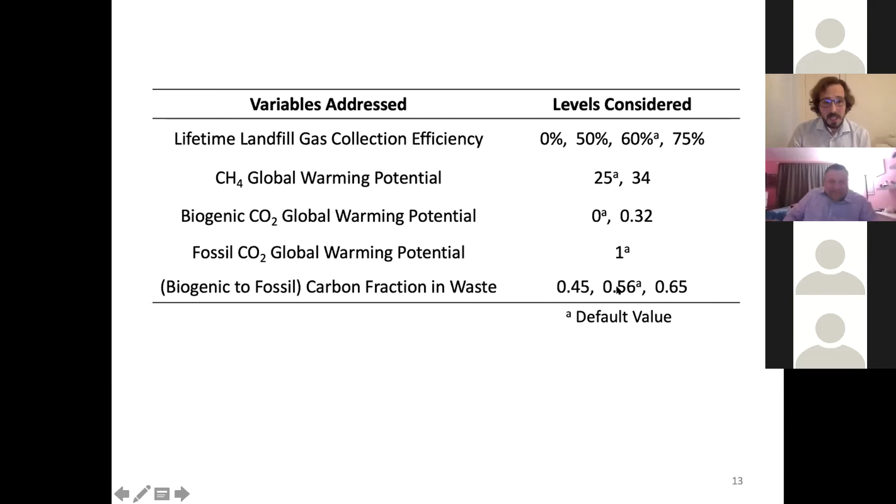Fossil CO2 is 1, can't really change that. That's a definition. And then we had the bio to fossil fraction. So for the year of data we looked at, 0.56 was the actual value, and we picked something above and something below to see how that played with our numbers.

All right, so the results. I got about 5 minutes here, which is perfect. So first things first, the first thing I want you to look at here is the little tiny blue bar on each of these. So the variable we're changing is landfill collection efficiency. These first 4 are the 4 values we looked at, and it's comparing it to the existing WTE situation.

So this little tiny blue bar here is transportation. If you could zoom in, you would see that the waste-to-energy bar is higher. That makes sense, right? As I said, we have a landfill on every corner. Okay, so we're not transporting very far if we're going to a landfill. But what this should tell you is that it kind of doesn't matter, right? In the grand scheme of things, that transportation piece is pretty insignificant.

And so instead, we're going to focus from here on out on displacement process, and really I'm going to focus on the total emissions. And so you can see the 60%, as I said, is kind of the understood value for lifetime collection efficiency at a landfill, and WTE is lower. Okay, even if we do a very landfill friendly, say we're going to collect 75% of that methane over the lifetime, you're still at displacement being over 300% better, and overall emissions being quite a bit lower as well.

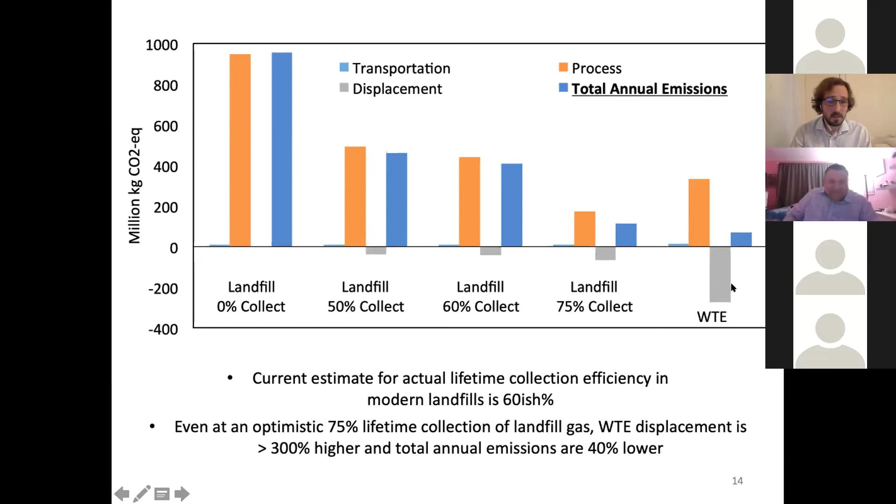Obviously, the landfill that collects no methane is huge for total annual emissions. But even these more realistic scenarios, and for that matter, the unrealistic 75% scenario, still are exceeding the total emissions from waste-to-energy.

We looked at global warming potential without going too deep into an atmospheric sciences discussion. Basically, every gram of CO2 that we emit decreases the impact of CO2. And if we're decreasing the impact of CO2, that means that the relative impact of all the other greenhouse gases increases. Okay, so this is why we used to say methane was 25 for a global warming potential. Now we're close to 34. So from a landfill perspective, that's obviously going to increase the greenhouse gas emissions. Doesn't really affect WTE, because methane's kind of irrelevant, right? Other than some of the supplemental natural gas consumption, it's really not a factor.

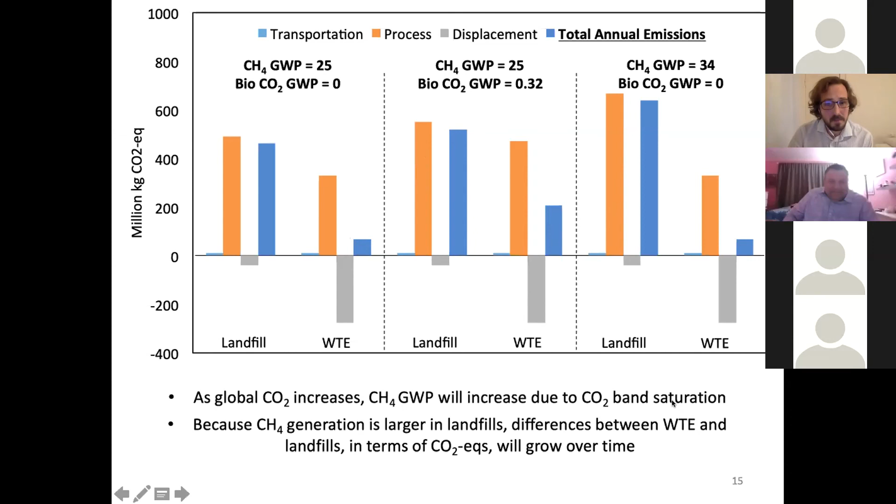Additionally, we looked at, if we say that biogenic carbon is 0, and we compare that to if we say biogenic carbon is 0.32, that's going to hurt waste energy because they're generating a lot of biogenic carbon. And you can see this bar was about here, and now it's all the way up to there. But even if we give that landfill friendly assumption, it's still much lower emissions than the landfill scenario. Okay, so we're trying to be conservative in the way that we approach this problem.

And then finally, the bio to fossil ratio. As I noted, if we burn a lot of biogenic carbon, that's obviously friendly for the waste energy situation, because those emissions are less than 1 from a global warming potential perspective. And so you can see that in this case where we have the most biogenic carbon, we see the lowest overall emissions. In fact, it's actually a negative number, which means it's an improvement compared to just generating electricity from natural gas, which again, I said I would never make that comparison. But in this case, I'm going to make an exception because it looks really good.

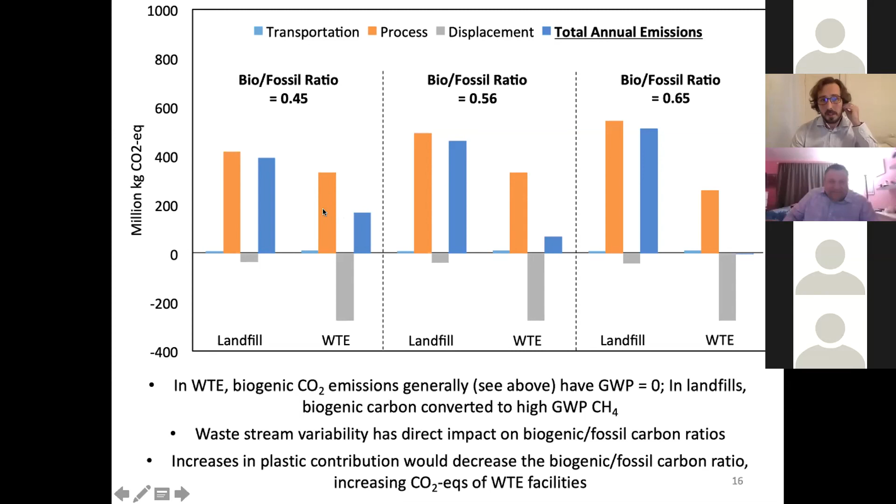And even in this scenario over here, maybe with the plastics crisis that we have right now, maybe a lot of that gets funneled to waste energy. Who knows where you would get a number like this 0.45. But even if we do drop to a bio to fossil ratio like that, you still see lower emissions for the waste to energy facility compared to the representative landfill situation.

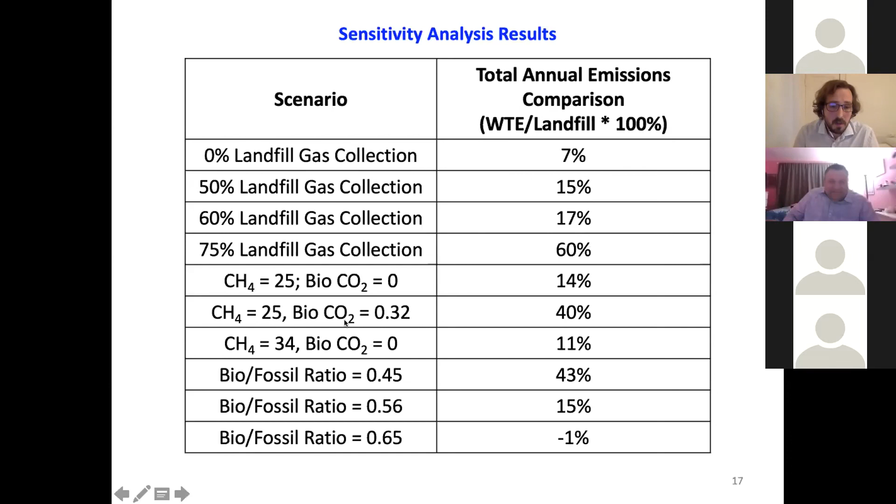So the last thing I'd like to say is just this idea of moving from reactive to proactive. I think this is the approach that we're taking at UB in our waste management research teams. This idea that engineering exists to fix problems, I don't like, and I think in the waste management sector, we've seen this be a problem, right? China says no more plastic, and all of a sudden everybody's running around trying to figure out what the hell to do. Okay, that's because it was sort of a reactive model there.

And we would rather use engineering to prevent problems instead of to remedy or fix problems. And so we have this idea of not working reactively, but instead working proactively. And I think this work here, this sort of modeling analysis, this mixed real data with modeling analysis, is a good example of how we're doing that.

So with that, I'll wrap up. I think I was less than 25 minutes. I hope I was, Ken. Yeah, just right on time, actually. All right, perfect. If there's any questions or comments, I'd be thrilled to take them.

Thank you. Now, there were no questions this time, but I will reiterate, because I remember when Covanta was talking about doing this study with the university, and that was the exact kind of discussion. Like, well, we don't know what they're going to come up with. We hadn't dealt with you guys before. We hadn't given any primers, and just helped you, gave you the data,